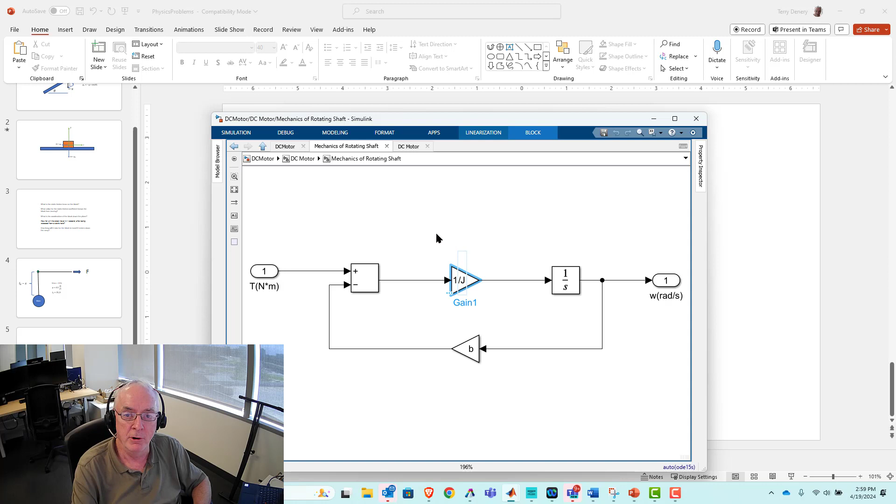All right, what is this? Well, that's the mechanical load for a motor that's just going to turn its own shaft, which makes the inertia of the shaft one of the key parameters. But in reality, nobody cares about the inertia of the shaft because it's really what it will be connected to, which is the most relevant thing.

So anyways, probably lots of people have tools like the ones I demonstrate. We'll demonstrate on a DC motor, but in a way it's a very, I'd say, unimportant problem. And a much more important problem could be something like this, the idea of controlling the angle of a linkage and maybe even a more complex mechanism. Certainly, you see this in all kinds of things, and I won't try too hard to justify that either. But let's continue with this idea.

All right. And so the other thing, we parameterize this, and essentially the model is defined by its resistance in the circuitry. I probably should have grouped mechanics and electric a little better than I did, but let's go now mechanically. It's the shaft inertia. But it's, again, generalized, because we're going to get to that in a moment. The mechanical load itself is defined by inertia, and in this case, damping constant, right? So for this DC motor: resistance, shaft inertia, inductance, the torque constant, and then the damping coefficient.

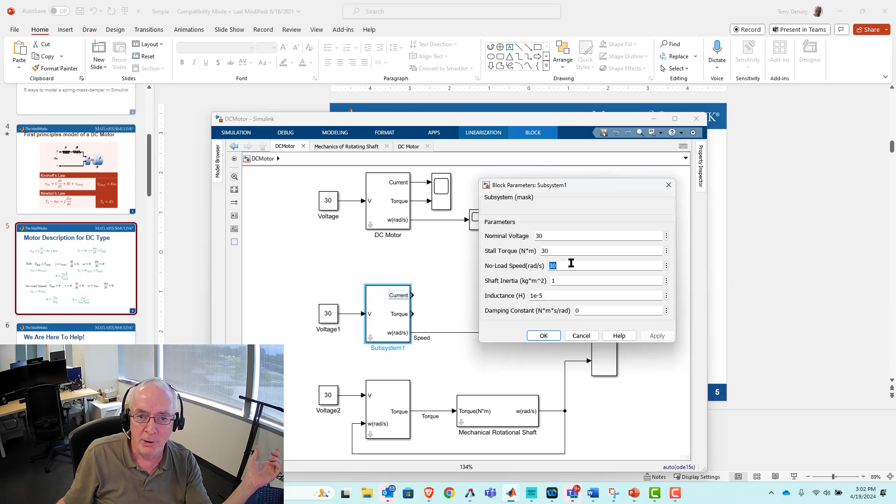The maximum torque you can have is the stall torque, and the maximum speed you can have is the no load speed, and the actual operation of any motor is going to be somewhere in between for each of those. Okay, so hopefully that makes sense. And certainly, if you ever have to buy a motor, you want to know what your torque and speed requirements are going to be, and you're going to choose based on stall torque and no load speed.

All right, so that's the first thing we did. And so then, we're still kind of doing this with this, again, kind of false application, which is we're just spinning a constant inertia shaft. All right, and so I'm not going to say that this is a better performing model, but it's one that gives us options as we move forward.

Okay, and so the basic idea was to take all this and just bring it outside, and mathematically it's identical to what we did here, and you'll see that what I'm going to call this electric motor is really interfacing with the mechanics through input and output ports, and that is a DC motor configuration. So I'll just call that the DC motor, and I'll call this the mechanics. Oh, I already have something called DC motor, so let's call it something really clever like DC motor 2.

Okay, all right. But I really like the interfacing that it sets up, which is motors are responsible for creating torque. That torque gets applied to some sort of mechanism, and that mechanism will move that axis according to what that mechanical load will be. And so only through the processing of that torque through a real mechanical application do we really get a relevant angular velocity, and that gets fed back, and of course that's used to identify the back EMF voltage, which is certainly part of the electric circuit calculation, right?

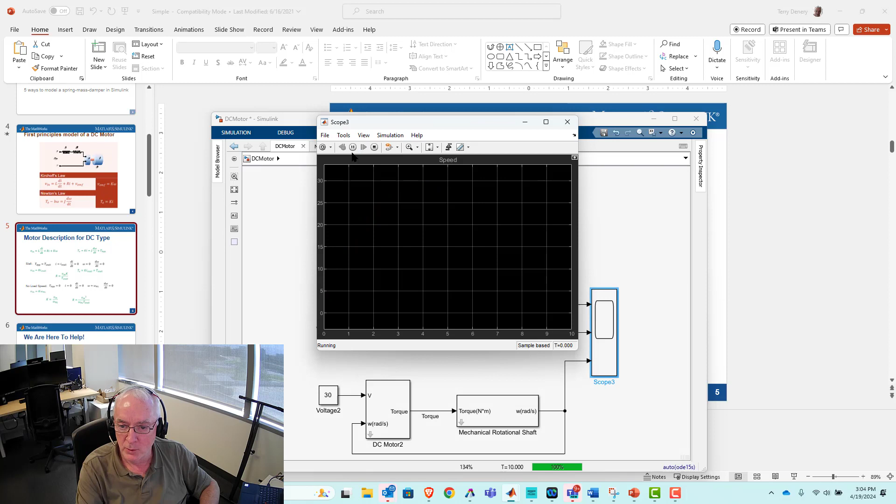And anyways, unless I change something between now and, yeah, all three of them are essentially predicting the same thing. So basically 3 curves right there, red, blue, and yellow. The red, of course, is the last one drawn, and therefore it's on top and we can't see the other two. So to me, I love seeing stuff like that because it means my presumption is correct and that I am accurate and I can move forward.

Okay, so again, just to kind of meet folks where they are, I'm going to go Control C, and I will open up a new Simulink model. Just paste this in. Okay, and yeah, let's do this one even. Again, we just proved they were identical, but this one gives me better options, so I'll paste this one in instead. So what's the difference?

Of course, instead of resistance, inductance, and so forth, we will do this. And it'll be nominal voltage, stall torque, and no load speed. What I also like about this is it was a very nice check to prove to yourself that you have done the algebra correctly. I will show you the algebra too. Let's go to

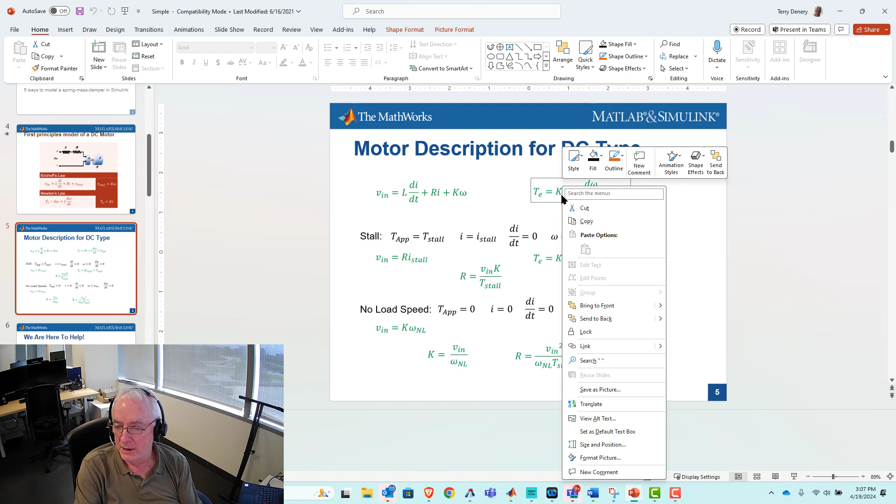And the electromagnetic torque is equal to K times I. Very cool and convenient, and actually quite obvious if you do the analysis, the torque constant K and the back EMF voltage constant K are the same thing. But anyways, come back to this. Well, T is equal to K times I stall, but d omega/dt is equal to 0, and so all that's equal to what we're calling the applied torque T app, which will be equal to the stall torque. And so this equation reduces to this simple expression, and this equation reduces to this simple expression. If you do the algebra, you get essentially a calculation of resistance based on stall torque.

All right, and for right now, K is still in that calculation, but when you go to no load speed, well, what's that condition really about? Well, it means that you can no longer apply any more current, okay? But actually, even before that, what do we really mean by no load speed? Well, what we really mean is no load at all, that there is zero torque generation. It's really when you get to that kind of definition.

That's when you recognize, oh, I is equal to 0, therefore di/dt is equal to 0. The speed, omega is equal to omega nl, the no load speed. And because it can't get any faster, it's not changing, d omega/dt is equal to 0. And with that reduction, you basically get this Vin is equal to K times omega nl, and we plug all that in, and we get very nice expressions for both K and R.

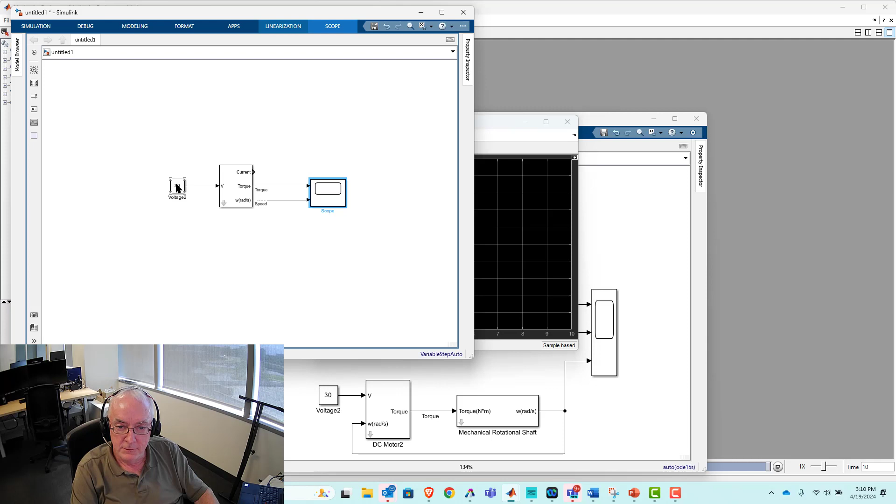All right. So, anyways, let's get back to where we were. And these are our values we're choosing. We may change them. It's all contingent. Oh, let's do this thing I wanted to do, which is let's scope torque and no load speed. Right. And again, notice the voltage needs to be 30 for this to work.

And so with the initial condition of 0 velocity, well, the yellow, that's the first one going in, starts off at 30, and we actually are watching the velocity. That's what the blue line is. And so we do see it starts off at 0, and as the velocity progresses, it reaches a bound, and that's our no load speed, which we saw was defined by 30 as well. And we see also that as it hits its no load speed, that torque reflecting current is equal to 0 as well. That torque will be equal to 0.

So, anyways, now here's where I wanted to get. Okay, all right. And so this was a guest lecture, and one of my colleagues is the regular lecturer, one of my friends, and so he asked me to do this one because he had a time conflict, a schedule conflict, but he also thought it was a good topic for the class. All right, and so he had already done his share of control.

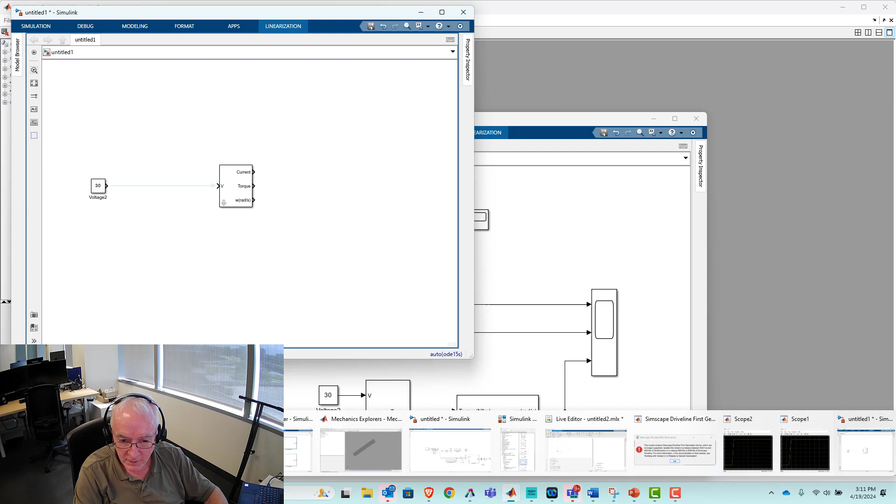He'd done a little bit of describing how feedback control can be used to control a DC motor. And actually, I'll do a little bit of a shortcut, I'll open up a model where I'll bring in his controller, right? And it's very explicit and straightforward, and that's why I like this. You can see the model so well with this, right? And so I'm going to copy that, and bring it in on the model that we're working with. All right, and I'll plug that in.

Right. Again, PID, it's the basic idea of what the error is, the difference between whatever we're trying to control, whether it's angular velocity or angular position. The difference between what it is and what we're commanding it to be, that's our error. And we are going to apply a voltage that will have a component that's proportional to that. This is what we call our proportional gain. A component that's going to be integrated and then multiplied by a gain. So that'd be our integral gain, and then a component where the derivative is taken, and we'll multiply that by a gain. That's our derivative gain.

Right. I think I'll start off 0 there, and maybe we'll make this 1. Okay, and I'm just going to see what happens at this point, because I haven't practiced this one a whole lot, but I want to essentially create the feedback loop. Again, as I mentioned, the error will be the difference between what we're commanding it to be, and we're going to command it to be 30. Right? And we're going to compare it. Okay, and I think I'll do position control. And so I'm going to construct my position by simply integrating the angular velocity.

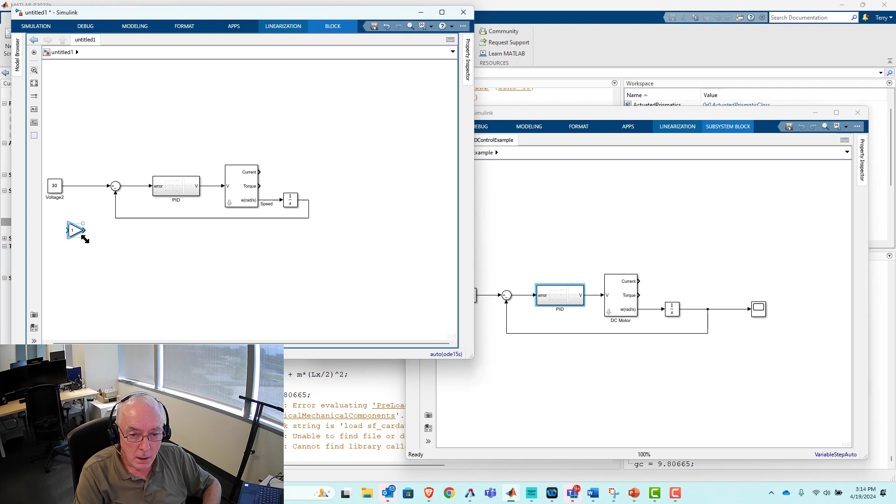180 divided by pi. Of all the gains I've ever assigned values to, probably 80% of them are either 180 over pi or pi over 180. Yeah, I'm doing that one all the time. But basically I just, oops, and I got it wrong. I need it to be the other one. So basically I want to convert from degrees, 30 degrees, to radians, whatever that will be. Okay.

And I think I will do the other one, though. I'll just kind of put it on the downside here. Okay, and we'll put in 180 divided by pi. And put a scope in. And I have no idea, actually, how well this will work, and so I'm just going to hit run.

And that apparently is position, and you know what? It's not so bad. And that's all proportional gain. Right? You see that right there. And we might play the game of trying to make that happen a little faster. And so we add a little more proportional gain, and maybe we'll try 5. I won't go too much further on this. All right, and we just get it faster and faster and faster.

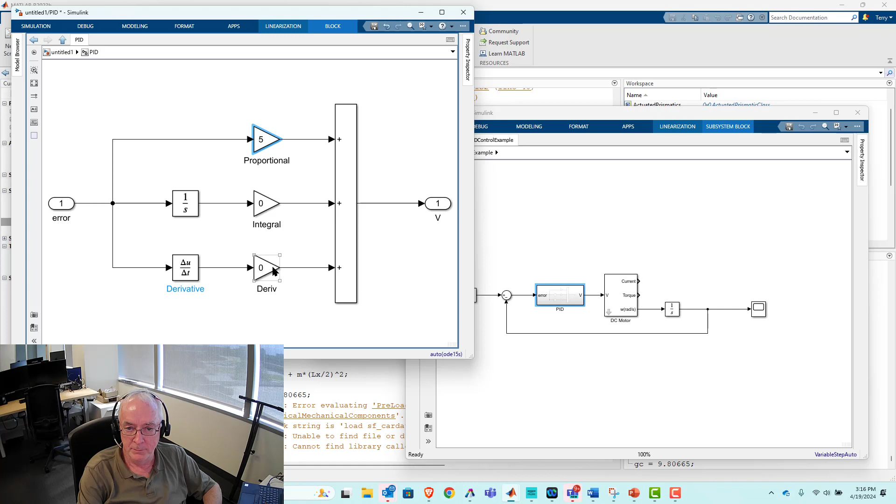Okay, and so in a way, there's always this oscillation, and I think if you're kind of observant, maybe in tune to the idea of waves and oscillations and frequency, you might recognize the frequency is very much dependent on the proportional gain. And there's a strategy to kind of deal with the overshoot that leads to, which is to apply some damping. And again, I'm going to just apply a little bit right there. Right. And see if I can kind of reduce that overshoot.

And whatever I did, I just made it way stiffer. And so I'm not patient enough to kind of wait for that to work its way out. So I'll just kind of come in here and I'll reduce things a little bit. Right. And I'd say somewhere between 0.1 and 1, maybe I'll do one more attempt at this. I'd say we reduced it a little bit. But again, I don't want to claim to be good at doing that.

And I do want to acknowledge that there are people I know, and there's a number of people at MathWorks who are really good at that game, and they know how to analyze according to the frequency domain, and they will use Bode plots and root locus plots and really kind of play this game of response versus stability, and be very good at this in a way that I can't be, right? But fortunately for me, there are alternatives, right? And so in a way, that's what this lecture will be about, right?

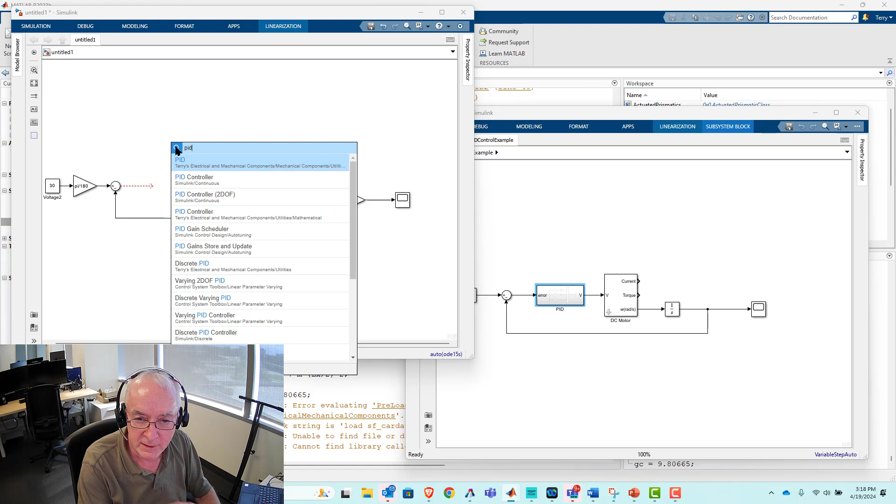And so I think that's about as far as perhaps I personally should go, but certainly, again, colleagues of mine could open up the Control System Toolbox, and perhaps even the DC motor is such kind of a piece of cake for them that they could show you all kinds of cool ways to do this. But what I like about this, okay, and so what I'm doing now is going into the Simulink library and grabbing the block that does PID.

Okay, now this is a very optimizable, it's also very reconfigurable, and so I'm going to show it to you. I'm going to go look under the mask, and you're going to see all kinds of stuff that's going on. That essentially, most of the time is mathematically doing what I showed before. All right. So, anyways, what I'm going to do now, though, is I'm going to click on this button. This is the tune button. All right, and there's something. Well, it may appear mysterious, but I'll say it's beautifully informed on the approach of controls.

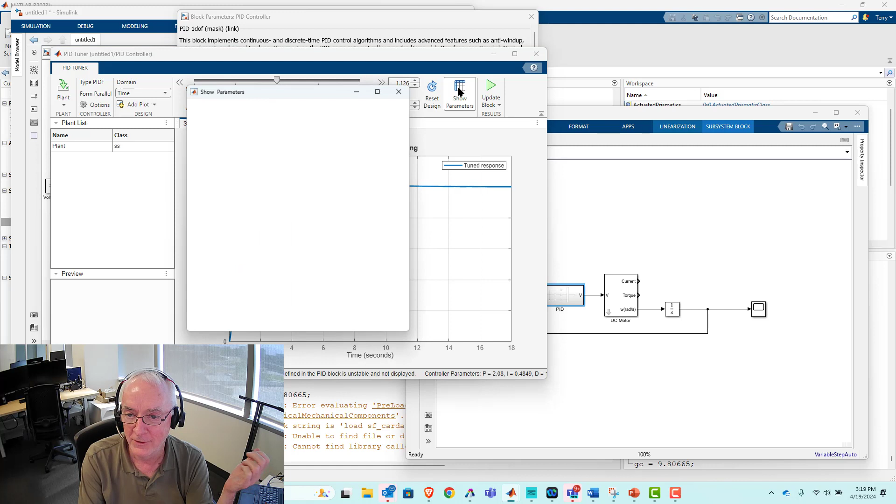And so what we're doing is, you'll see that when I click on this tune button, that's going to linearize the plant model. It's going to do things like identify the open loop Bodes and open loop transfer functions and all this kind of stuff. And based on that, it's going to take these methodologies that, again, a number of my friends are real masters of, and it's going to figure out optimal gains for this.

All right, so there's KP, there's KI, there's KD, there's N. Why did it need to kind of sample the model? Well, because KP, KI, KD, and N absolutely care that it's a DC motor with the parameters that we chose it to be, with the mechanical load that it's really applying this to.

All right, and so again, I like this quite a bit, and the thing I'm going to do now is just show that you haven't given up control of this at all. And I'll say that again, as you consider both faster and more robust, you're playing that game between response and stability. And in general, I just like to hit the faster button, right? And so with that, I'd say a little bit stronger gains, but I have much better response, which is measured by things like rise time, settling time.

And you'll see that as it, again, optimizes the response, that there is an overshoot, all right? And in general, you want to minimize that overshoot, right? And I won't go much further than that. I'll go ahead and close that. I'll update the block with the values that it identified for us. And I'll close that, and you'll see all those numbers are in there right now, right?

And that's too bad it kind of cleared what was there before, but I'll certainly show that we got a pretty nice response now. And so we commanded 30 degrees, and we're hitting 30 quite well. All right, and so we got a little bit of an overshoot. And this is where I'm going to kind of put this on the shelf for a second, all right? But we're going to come back to this.

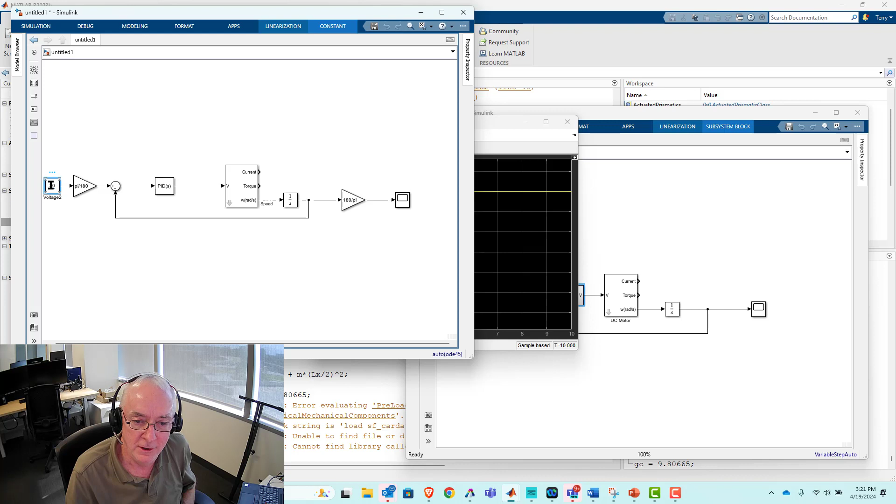And one of the beautiful things about PID algorithms is, well, they kind of acknowledge, well, I can't do that. It's a violation of F equals MA, which exists in a rotational form, at least in this kind of two-dimensional problem: torque is equal to inertia times alpha, the angular acceleration, right? And so that's a very reasonable response. It only overshot about 4 degrees, and got to 30 clearly in less than 1 second, right? So that's kind of cool.

Right? And so, you know, there's the idea of the impossible request, which is that right there. But there's also this idea of carrying through lots of state variables, DI, I, omega, and position to get what you need, which is far more complicated than what really can be handled.

And so PIDs are nice. They're empirical. They will work, and there are methods that can tune them to really get very favorable performance and responses for your system. But if you really need to be accurate and you cannot tolerate overshoot and stuff like that, there are ways to be better. Okay, and that's what this lecture will move into.

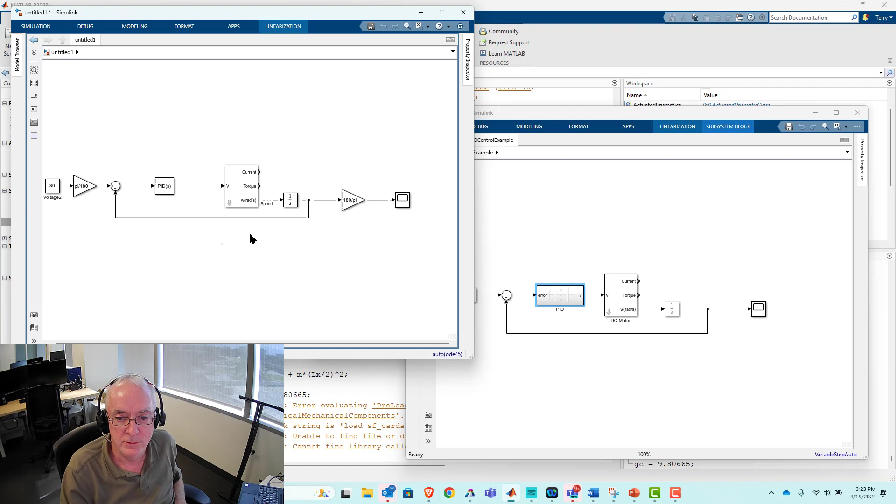All right, and so I think the first thing I'll do, okay, what we got right here? We got 30, 30, 30, 1, 1e minus 5, and 0 damping. Okay, fair enough. All right, so let's go back to my DC motors. Right there, right? And we already proved ourselves that these are all the same. So we should be getting the same response with this. So let's see, how do I select all this? I think that will do it. Let's go Control C. Let's paste this in like this.

Okay. And let's make some room. Make that a little bit longer. And let's replace this. Okay. All right, and so let's go to the scope. Let's hit run.

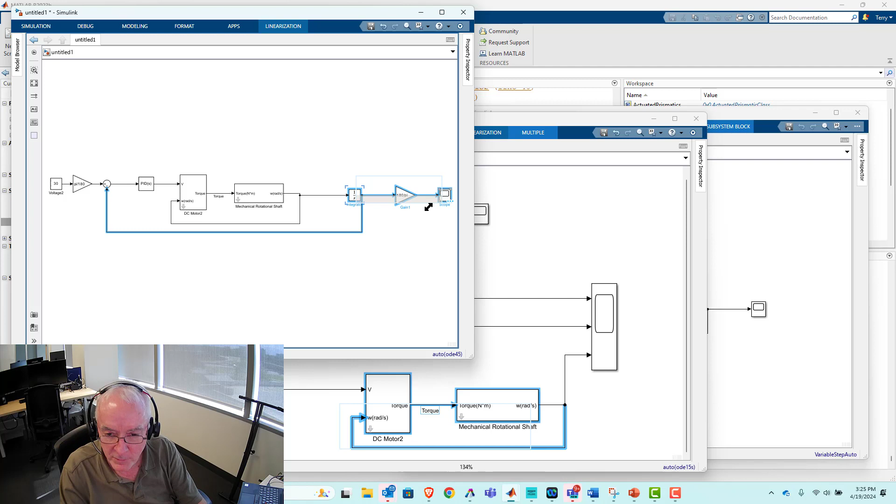So that was bad presentation on my part because we had already zoomed in on the range on this. And so this is the exact same result. You can see that's about 4 degrees overshoot. And if you compress the scale to about 2 seconds, I think it looks pretty close. So please excuse me for that. All right, I'll be a little bit anal at this point and just get those lines a little straighter.

All right, and okay, well, here's an idea. Kind of bring this up. This is how this lecture actually started yesterday. I did this live, and what I did, here, I'm trying to get to my YouTube account.

It can be a little embarrassing showing your YouTube stuff, but let's go to playlists, and this whole session really began right here. It's my YouTube channel, Terry Denery's Engineers Studio. And I went to DC motor control with an Arduino hardware. I'll even show it to you. I got it right here on my desk.

But I don't want to spend the probably 10 to 15 minutes it would take me to do this live. But anyways, here's the Arduino. It's on an Arduino motor carrier. My motor is this kind of $20 DC motor with an encoder that I bought off of Amazon, and basically I started off showing that I can make that thing turn four revolutions in 3/4 of a second and do it with almost

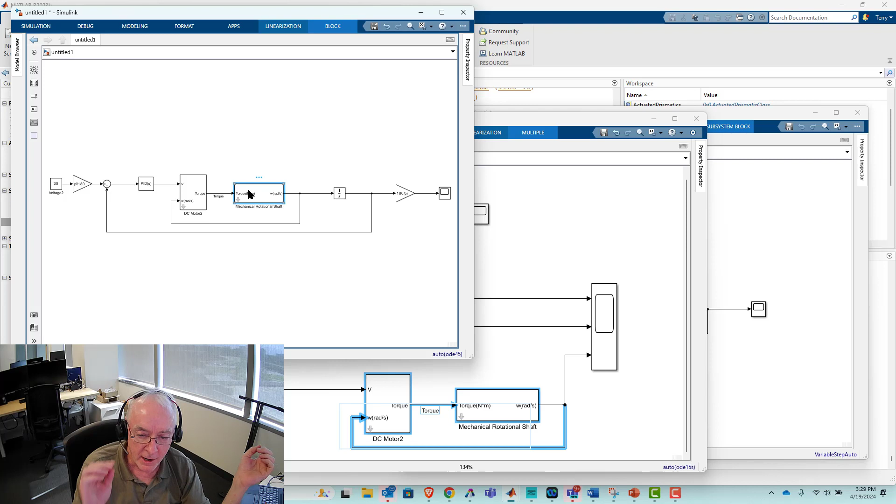And I meet with professional customers of MathWorks tools all the time, and they're always looking for advantages to get more accuracy, more response, and more robustness and stability for their calculation. Okay, and it turns out this kind of feed-forward approach goes hand in hand. Actually, I think this is a good point to deal with this, which is the simplicity of this problem is a bit of a problem, right? And so we're going to switch now. Let's get to it.

I created these models right here. I think I'll even package these. All right, so let's go like that. Create subsystem. This is what I call forward dynamics. It means I'm sending motor torque expressed in Newton meters, and I'm going to get the response of the motor. So we're going to create that. You'll see motor torque and motor underscore M. Let's see, how do I want to do this? I want to keep it simple, or at least let's call it focused.

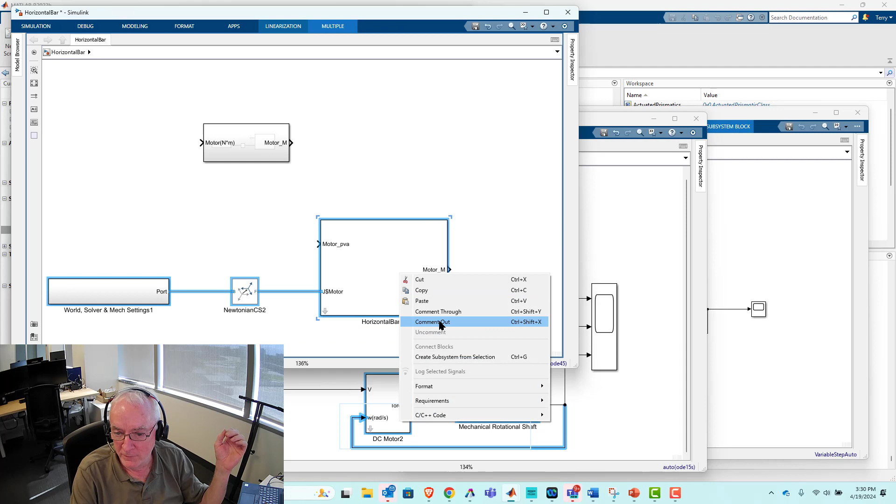All right, and I think I should show you what this is. So let's go ahead and simulate it. Let's hit the run button. And let's bring up the animation of that. Stop, reset. Okay, and we got 2 beams there, and here's one we're just running. I know I'm showing a lot, and I want to make sure that this is not confusing. So I think the best way to do this is let's hide this one right now and essentially remove it from the calculation. So it's merely commented out now.

And this one, I want to give it a better name, so when we focus on it, you'll see what it is. So I'll call it Terry horizontal bar, with the space in between Terry and horizontal. Okay, now let's run it again, and this time we'll just see it by itself. All right, and there it is, Terry horizontal bar. Let's reduce, move it up slightly, and observe it one more time. So basically it's a simple pendulum, all right?

But in truth it's actually a motor, and it means that we can send a torque in, and through that torque, control its movement, right? And that's the way to put torque in, right there. It's always good to do a little bit more demonstrating to prove your point. And I think I can show the effect of the torque here. So I'll hit the green button right up here. So I'm running it from the animation window.

Oh yeah, clearly 1 Newton meter is going to push it up, and once it's going up, there's no stopping it. It's going to just continue to gain speed. You'll see a little bit of what they call strobing. Yeah, so the animation gets a little bit weird. Anyways, I think that's enough. I'm not going to belabor this too much. All right, so I'm going to go Control C. All right.

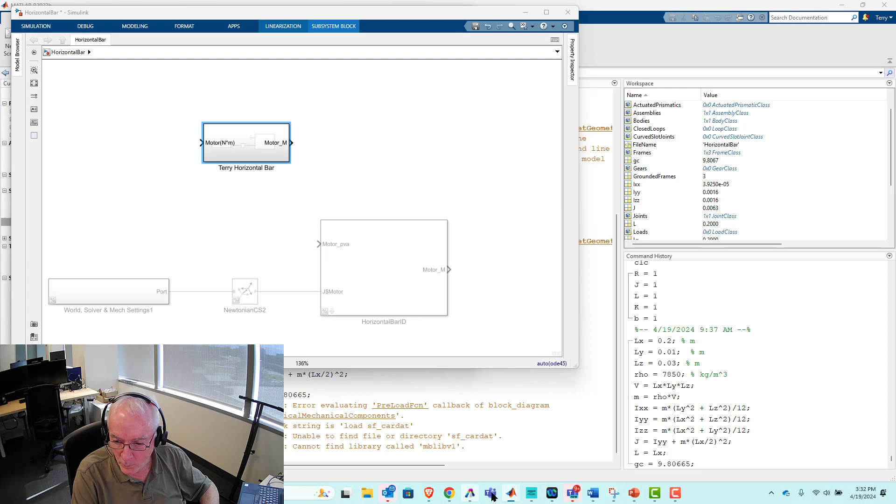Some of these things down. I don't think I'm going to need the DC motor anymore, and if I do, we'll just bring it back up. So let's go ahead and say no on that, and let's get to the model we were working on. Got way too much open right now. So where is it? It is right there. It's untitled. We still haven't saved it, so all this is fresh.

Again, I'll just run it one more time before we start changing things, and this is where we stand right now. I think we're reasonably confident we're accurate at this point. So what I want to do now is paste in Terry's horizontal bar. And now I need to fix something. I don't know if it's really broken, but I do need to address something. First of all, why is that line thicker than that line?

And so let's go to bus selector. Okay, keep on missing. Yeah, you should do it this way, go back up. Okay, so this is a bus selector. You need to connect to a line before you really should open up the block parameters on a bus selector, because what's going to be filled in is really the contents associated with that line. And so it's essentially a stream of information.

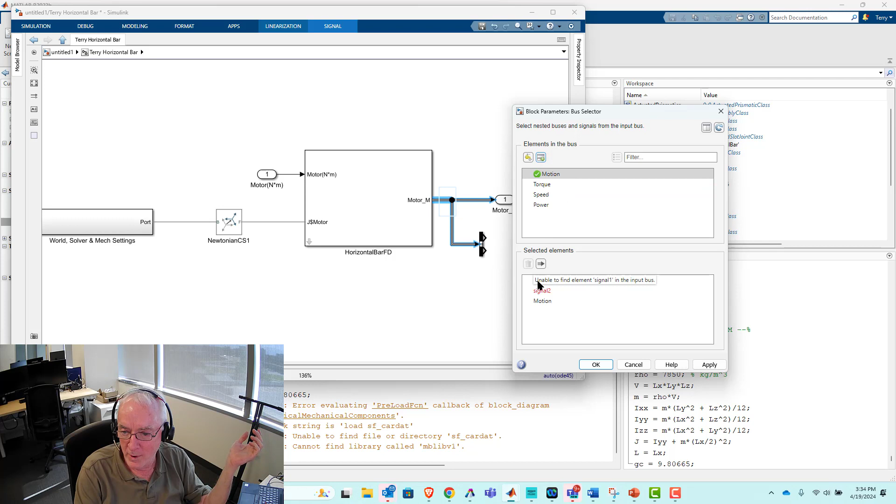I think the word bus actually came out of the electronics industry, and it's a way to essentially pack up a bunch of sensor signals, perhaps in multiple wires, but also put an interface on it so that you can go pick out what you want. And so anyways, we're going to pick out motion. With regard to this presentation, we haven't explained quite well yet what we mean by motion, but I'll just reveal it right now.

And I think I'll do it this way, DEMUX. This is a packing of signals too, but think of this as an array with 1, 2, and 3 elements. The definition of what we call motion is really the combination of position, velocity, and acceleration. And why is it 3? Well, F equals ma is in a way the reason, and mechanically it's generally 2 states that are carried to define the current condition of that mechanical system.

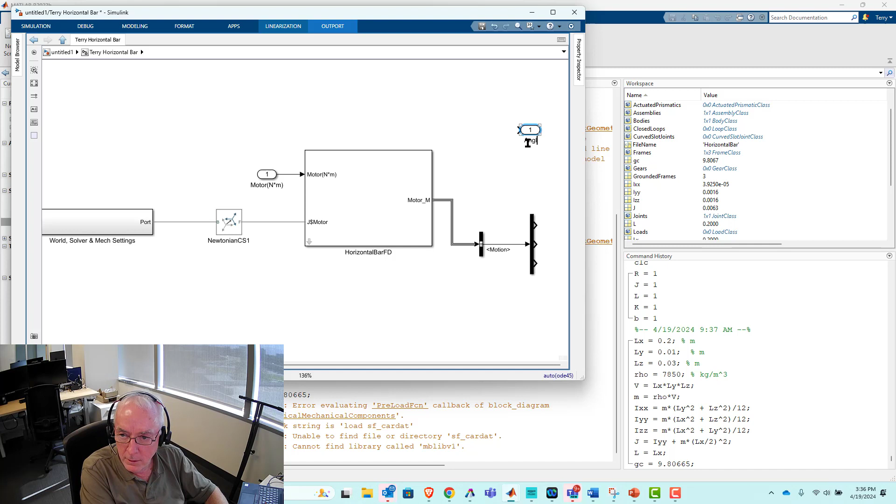If you think of what we're doing with this example, a horizontal pendulum, think of its angle and its angular velocity, so theta and theta dot, as its 2 states, and then the driver of it, of course, will be the second order derivative, theta double dot. But what I want to also do is let's delete that. Let's rename this. Let's call it angle. And again, I always like to put in units, radians per second. And that's pretty good.

I'll put that right there. Let's get Terminator, just so we don't get any warning messages. Let's plug those off like that. And now I think it's getting really clear that we're defining an interface between electric motors and mechanics. I'll even make the boxes the same size. Oops. Click on that, shift, click on that. And I'll go to format, and I will match the sizes. Okay.

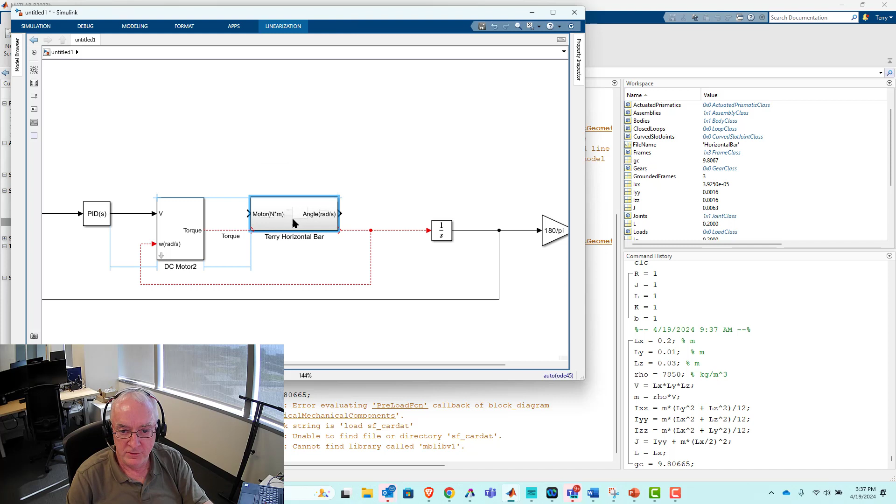Mechanical loads change like that. Where did this block come from? Well, this came from whoever designs or models the mechanics. So perhaps we're seeing a little bit of this idea of groups working together in collaboration. And if they are going to work together, they better be on the same page with stuff like this, which is not only that it's an input of torque, but an input of torque expressed in Newton meters, and it's an output of angle.

And look at that, I got an error there. We did mess up. I'll back up a little bit just to show the error. This is radians per second. The fact that this guy's capable of measuring angle, maybe I want to standardize a little bit more on angular velocity, but I doubt it. So I'm going to make the call and say, in this case, our output, our measurement will be angle, not angular velocity. So I'm going to delete that, pop that in, and of course, we don't need to integrate that anymore to get position.

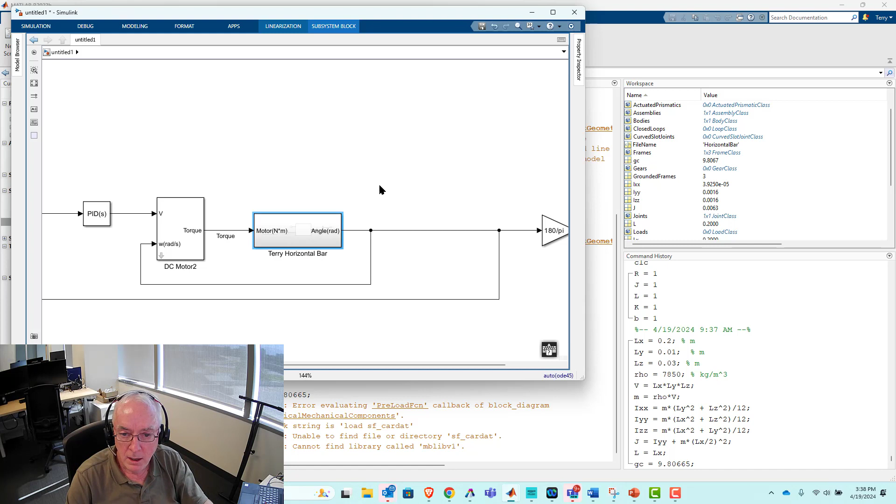Okay. Now this worked so well last time. Well, I don't think it's going to work nearly as well. Wow, that worked pretty well. Okay. And got kind of a crazy oscillation at the beginning, and you might even argue that my mechanics is outsized by how big this motor is, right? And again, nominal voltage is 30, stall torque's 30, no load speed's 30, inductance 1e-5.

And we'll kind of work on this one though too. Oh, here's always a good thing to check, right? Is we got voltage right there. And you'll see there we're basically requesting, what is that, about 900 volts? Yes, with a big oscillation, right?

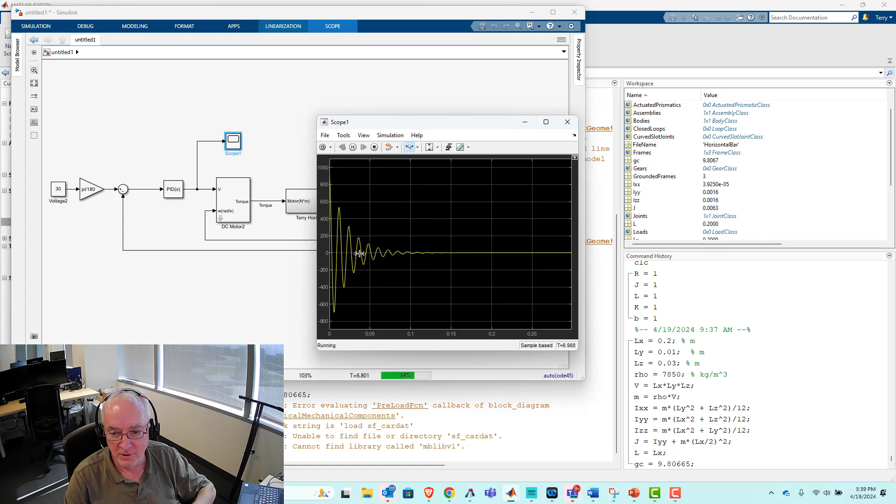So along the lines of what I really wanted to get at, which is this is not the way you do it. You do not use a single PID to essentially control, I believe it's 4 operational states for this overall system. And so I'd say that kind of the reality of this will kind of come through. Actually, this is not, I'd say, the way to do it, although it's a useful thing to do, right? It probably is the way it is done sometimes, but I'll put the limits on voltage into the controller so it can never ask for more than an absolute value of 30 volts, and let's see how well it does that.

And again, I would say that is not awful. I'll say it this way. I'm kind of impressed it did that as well as it did. All right, and if you look at that in an animation, you get, do that one more time. Stop. It's kind of a weird motion, but absolutely it could work. And so I'm not going to condemn it, but I'm going to just say that I think there's a better way to do it. All right, and where we're going to go really is that transition.

Okay, again, we've already talked about the impossible request, which we're saying go to 30 degrees according to whatever your PID and your DC motor will allow you to get away with. All right. Now, the other thing we're dealing with here is, well, we're using a motor that perhaps is capable of way more torque than we need, and that we're perhaps limited by what range of speed it's able to operate under too. But again, these are good things to understand, stall torque and no load speed.

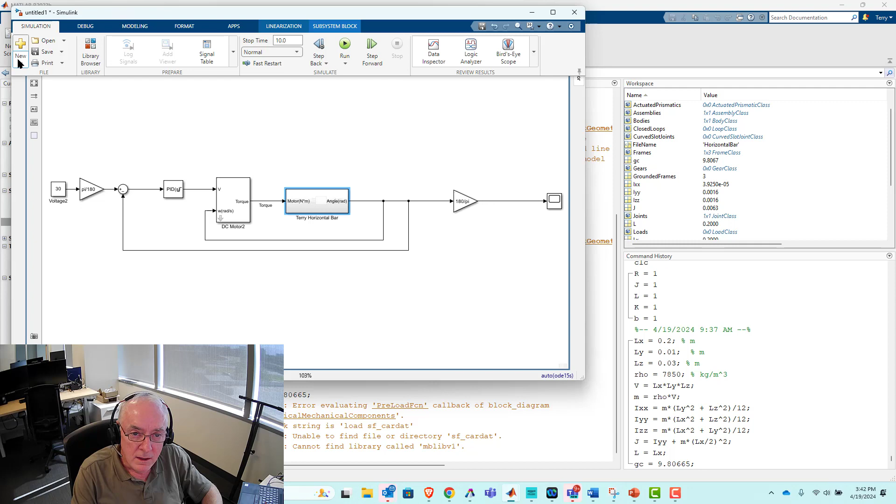All right, so the way I think this is best done, and so I'm going to just start from scratch again, is to do what they call inner loops and outer loops. All right, and so the way you do that, well, you kind of begin with the outer loop. Now I think as we go through this, why they're called that makes more and more sense too. But let's go here. Let's go PID. Oops. That's my own configuration. You see it shows up in Terry's electrical mechanical components. Right? So this is one that ships with Simulink.

So we're going to use a PID again, right? And we're going to adjust directly the motor torque. We're not going to worry about the motor itself and what voltages and currents need to be. We're going to just say, if I have this ideal torque delivery system, I want its torque to be adjustable to get the movement that I'm going to command.

And so let's go ahead and construct that error. I'll get a sum block. And I will feed back that angle in radians. I will assert 30 degrees again. Right. And let's measure it with one of these two. And let's put a scope in there to get it.

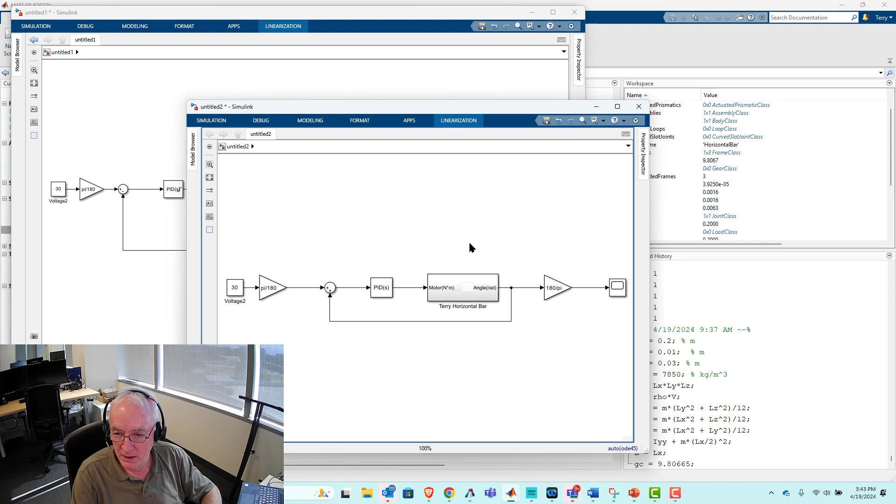Okay, so that's basically what you'd call an unstable controller, right? And as I mentioned earlier, that's what control engineers worry about. They're absolutely concerned about stability, at the same time doing accurate control with rapid response, right? But it turns out KP and KI, probably both being one, is probably way more than you need out of this, right? And so again, it's the idea that this PID adapts according to the problem at hand.

I'll say it this way, the values of KP, KI, KD, and again that fourth parameter N, which defines the quality of derivative that you might calculate, those parameters can adjust to apply to all kinds of applications. And again, it's a remarkable thing, right? And so we do this whole method and we linearize the system and everything, and here's the values it will give us. And I'd say I'm not happy with rise time of over a second, nor a settling time of almost 14 seconds. So I will make it faster on my own.

And perhaps I like that. It's kind of interesting, all three are negative, right? That makes me think I made an error, right? And in a way, the method is kind of clear in saying, oh, I don't care, right? And there's your error right there, you know, that's not an error calculation right there.

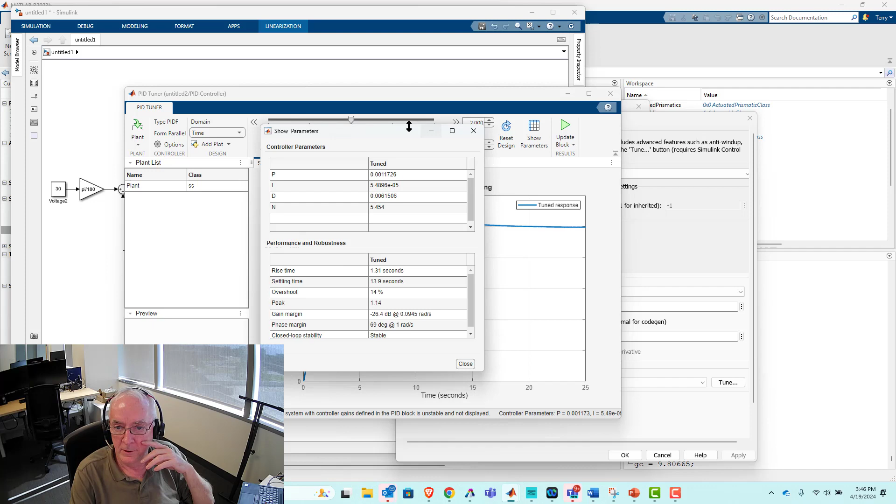So again, we're starting off with KP equal 1, KI equal 1, zero derivative, but this filter parameter N will have a value of 100, right? And so let's go to the parameters. I think we'll see they're all positive this time, which they are. And if we want it to be a little bit faster, those are the values we get now. And I think I'm probably good with that, so let's go ahead and close that.

Let's update the PID. All right, and close that. Make sure I get those numbers in. Yes, I did. And so that is really, really interesting. Okay, so what happened there? All right, well, one way you might fix it is, okay, I think I somehow fell short of the faster response I want. So let's go ahead and retune it one more time. But there's a number of reasons we got that interesting response we just got.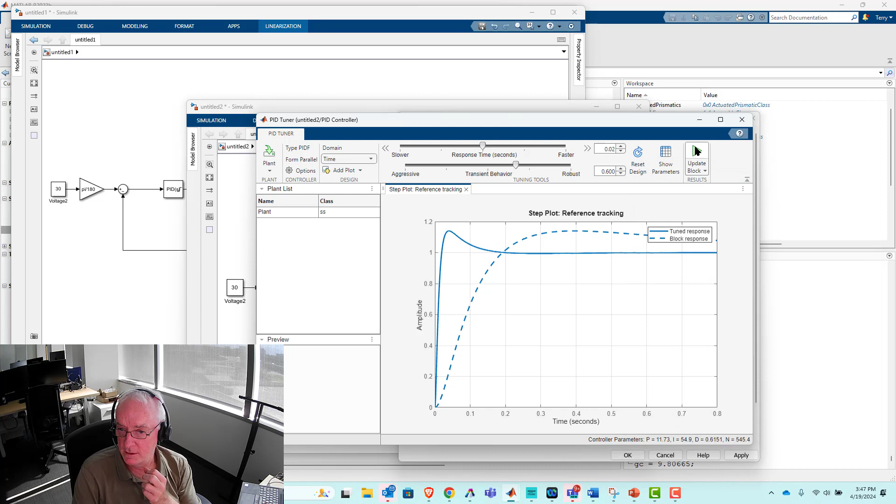Okay, so yeah, I did update it with those values right there. And let's try it maybe one more time a little bit faster. All right, and we'll close, update, and we now can close this. Those bigger numbers are in there now. All right, and now we get to work.

Okay, now I think that was an interesting error that we just observed because it revealed quite heavily that this linear control approach can be a problem because it is a linear control approach. And what we ultimately are doing with PIDs is we're really attaching, you might call them springs, you might call them rubber bands even, between how we want that pendulum to move and how it's really going to move, right?

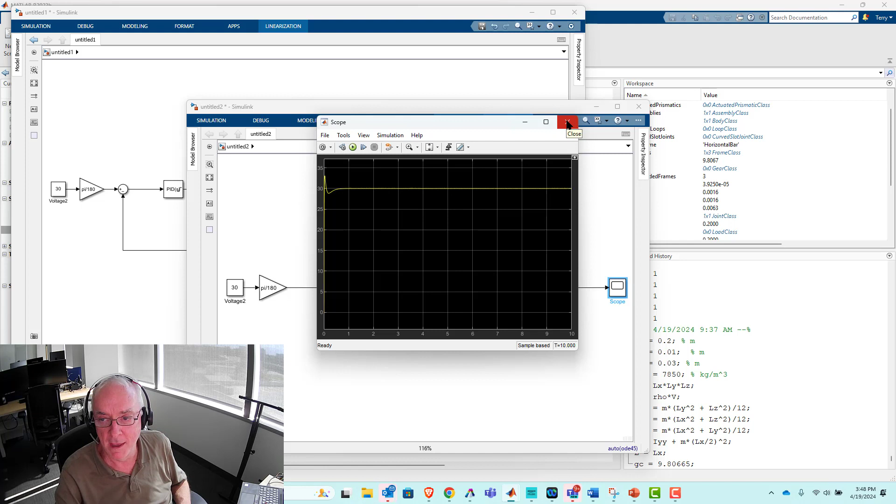And if you especially look at the proportional component of a PID, it's exactly the formulation of an ideal spring. Follows Hooke's law to a T. So anyways, that's kind of what PIDs are, and it's amazing that the methods are there to really rapidly adapt them like we just did here. And in general, if I make a PID strong enough, I can get something like this to sort of work. Now again, you'll recall we're going to have to have an electric motor do this, right?

And so now I want to address a couple of things. I want to now address the impossible request. And at the same time, I want you to be in charge of the transition, not the PID, okay? The PID's job is really just to keep it moving the way we want it to move. And certainly we know we cannot ask it to move impossibly as we do with the step function.

All right, so let's go ahead and now get into what I call PVA, or motion. And we saw motion a little bit. Where was that? We saw it in here. We saw we muxed or demuxed it, and then we terminated out the velocity and the acceleration. All right. And why is this so important?

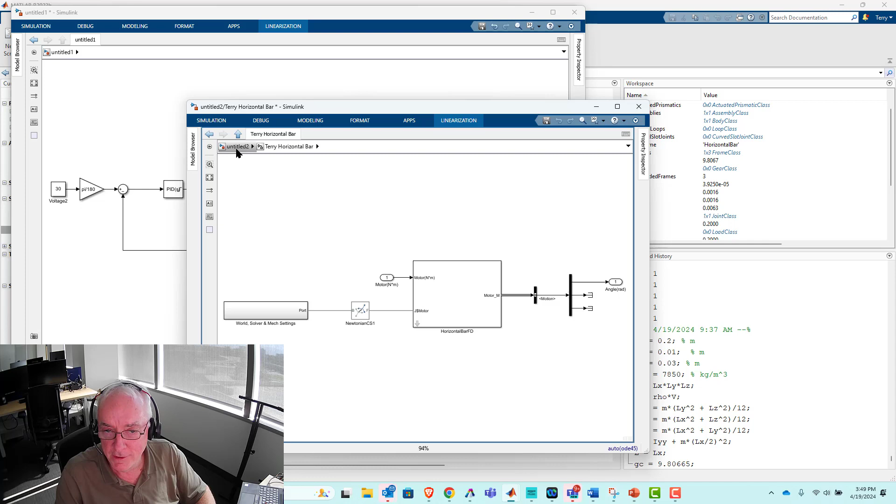Well, if you do the equations, actually this is what I spent a little bit of time on this afternoon, on the mechanics of a pendulum, it's all about theta, and it turns out theta dot, in the case of a pendulum, is actually not that important. But what we get is a relationship between the torque applied, the inertia, and the second order derivative of theta, which is essentially the angular acceleration. And it's an equation that sort of looks like this.

It means that if we apply this torque Z, and we have a torque that's going to be produced by gravity acting through the center of mass of that beam, we know that that center of mass is the midpoint of the beam, and therefore it's L over 2, and that moment arm, therefore, is L over 2 times cosine theta.

We kind of know what these equations sort of look like, and certainly we're seeing very clearly in this example that it's got a dependency not only on position, and that's the kind of less obvious one. We obviously know the torque has a dependence on the angular acceleration. And it's clearly a nonlinear problem because we've got this nonlinear function of theta involved in essentially setting what the angular acceleration will be.

And so anyways, I don't think the linear method... Well, I'll say this: I think it's pretty darn impressive it works as well as it does. So let's begin by again choosing a motion. We're going to go to Simulink Library Browser, my motion signals. We get one of these guys, smooth step. Again, I've got way too much stuff open. Okay.

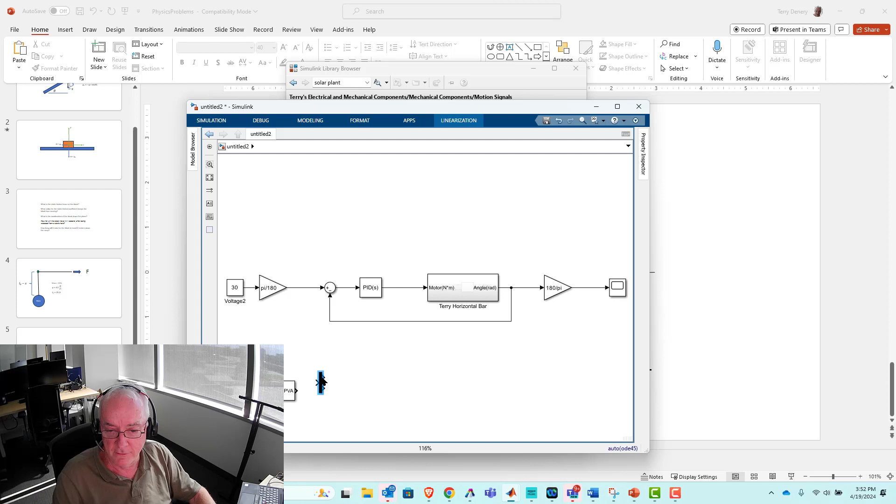So again, I'll demux it. There's something called a selector, which is a little cleaner, but for our purposes, it's kind of nice how explicit this is. I'm going to get a scope on this. Let's make that as tall as this one is, and under format, we will match the height. Then we'll bring the signal right up to the scope, and it will create another port for us, so we've got all three of them. Let's hit run.

This is showing position in yellow, velocity in blue, and acceleration in orange. That's why I created my own blocks, because I wanted perfect calculations of position, velocity, and acceleration. As you separate these, you'll see position on top, velocity second, and acceleration there. It's pretty clear that's the first derivative of that one, and this will be the first derivative of that, hence the second derivative of the position. So P, V, and A.

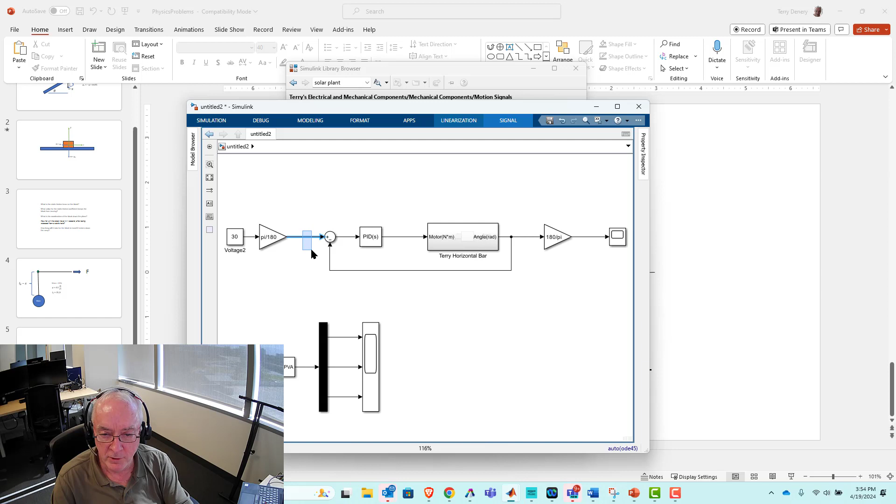So let's set this up. Let's start the transition at 1.5 seconds, perhaps go for 2 seconds, and of course go to 30. Now I'm going to replace, and I need this to be in radians once it gets to the motor, so here's where we'll make our replacement. I'll pop that in like that and hit run, and at 1.5 seconds we should see the transition. And we see it actually works really quite well.

Anything I want to say with regard to that? Not exactly sure what that is; I'm not going to fret about it right now. Again, it's not a whole lot of drooping, but a little bit. Let's do the quick analysis on it. Here's what we've commanded to happen: the first 1.5 seconds, we just wanted to hold a position of 0. So what happened on the droop? It got to 0 pretty quickly, probably by at least 2/3 of a second it's pretty close to 0.

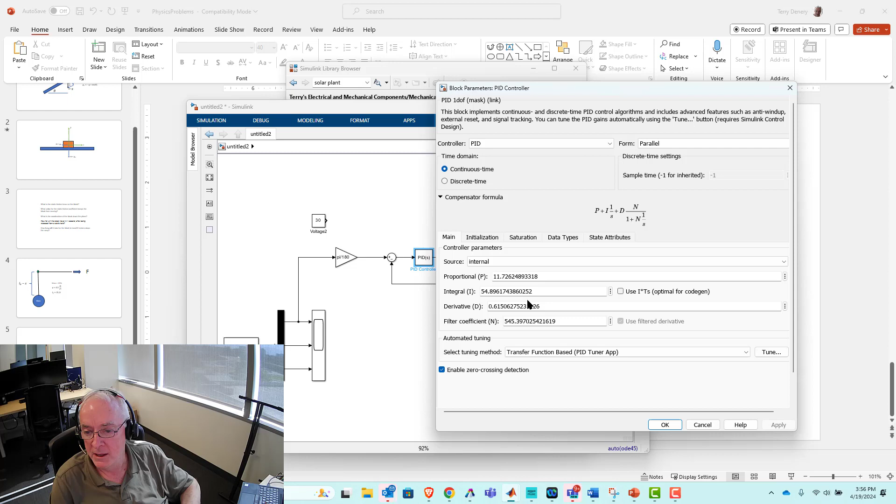After a little time, that error got integrated and built up enough so that, once multiplied by this number, it was able to zero it out. So that's PIDs, and actually a good example to explain what integral control is all about. Otherwise, this is better than I hoped for. Look at that, that's quite beautiful.

Almost 0 overshoot. There's a little bit, you can see it right there. This is degrees, so we're talking about a couple of hundredths of a degree of overshoot. Now, let's see how far we can get with that, and make this maybe 0.5 for the transition this time.

Okay, and we're going definitely much more, and we're about 1/2 a degree at that point. Again, you might be perfectly happy with that, right? You might not like this, but there are lots of ways to deal with that one, and let's not really even be concerned about too much yet.

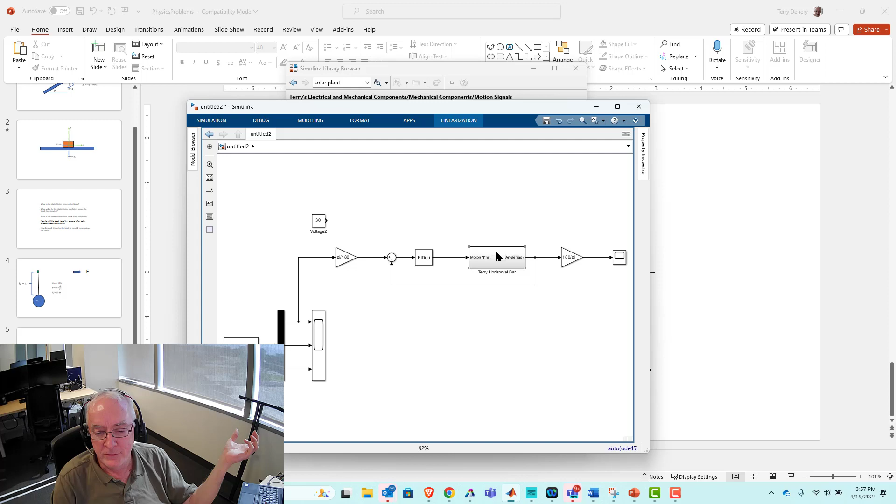But I'll just say that the errors we're seeing and the overshoots we're seeing, and certainly when we asked the impossible requests, well, how do we approach the impossible requests? Well, let's do it this way. Let's make a transition in 0.05 seconds. Okay. Now, it seems awfully fast, but that's real. And we begin to see something that looks quite a bit like what the step response was.

All right. And so anyways, let's now fix this, right? And so now I'm really going after the linear control approach. And so I think the easiest way to do this, actually, here I'll show this model. This was the other thing I was working on today. It's a little bit of a mess, so hopefully this is not too much of a problem. Okay. Boy, this is a mess. Okay, let me get into this a little bit.

All right. So we saw that equation in my PowerPoint slide, and it's essentially expressed in this MATLAB function right here. And so theta second derivative is calculated in terms of the applied torque and the current angle, as well as the mass, the gravitational acceleration, the length, and of course cosine theta. So we saw that equation a little bit earlier, and we simply integrate that.

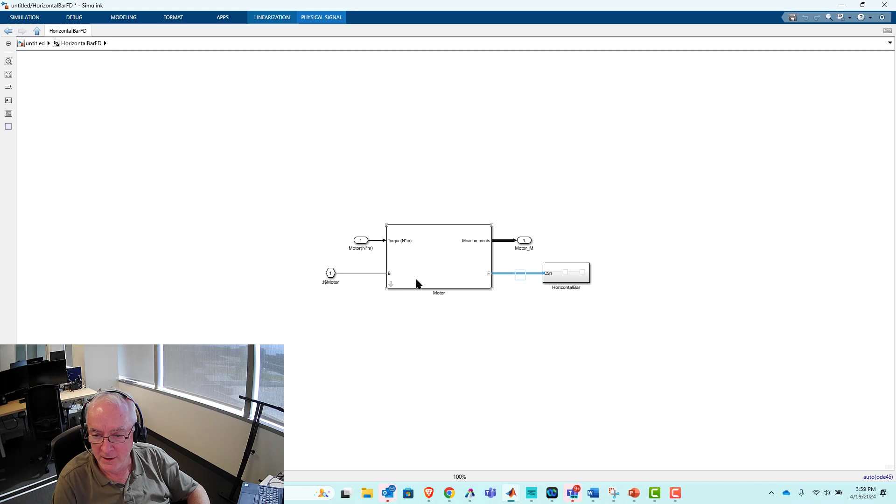And this part of this is merely, I'll say, something that I validated with our mechanical model. Now, we haven't talked so much about this, but let's go and get into it a little bit. This is Simscape Multibody. Notice lines don't necessarily have to have arrows anymore, and that's because we're talking about mechanical structure at this point. And the structure of this mechanism ultimately is that there's a rotational joint connected to the ground on one side and connected to the bar on the other, and that we can apply torque through it,

and that we can measure all kinds of great stuff, including the torque we put through it, but as well the angle, which is called Q, the angular velocity, which is called W, and then the angular acceleration called B. And you'll see from this we can construct things like power calculations, which would be torque times speed, and this is essentially the creation of a very useful output which we pump into a bus. So this is Simscape Multibody, and of course the bar itself is perhaps the most important part.

And there's that bar, and based on that shape, we parameterize with a MATLAB variable its length, so we can make it longer if we want. But that geometrical definition of length, width, height, defining a volume multiplied by density, then leads to the mass properties. And so you update this and you see mass, but you also see moments of inertia and center of mass and important mechanical parameterization. And position, of course, is everything.

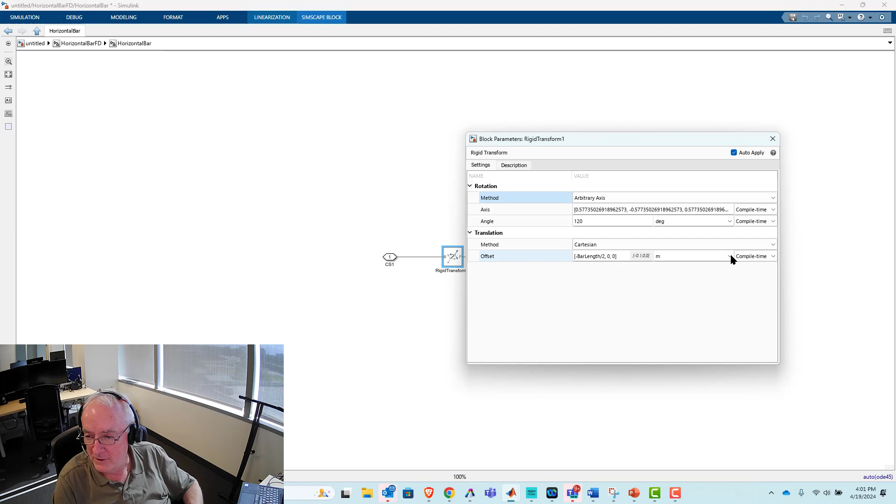Again, part of Simscape Multibody is, how do you position these, and you use all kinds of rotational methods like quaternions, rotation matrices I like, and Euler angles and stuff like that. And then positional offsets are kind of easy. X, Y, and Z Cartesian is typically the way you do it. So that's the kind of quick and easy, you don't have to be an expert in rigid body mechanics to do it kind of stuff.

Whereas the approach I took here, I wouldn't call myself an expert, but maybe I can do a little bit. And so I did basically the pendulum problem. So with Simscape Multibody, we got a more generalized methodology, but I'd still say if you do know the equations of motion, they can be pretty useful too. All right. And okay, so why is this important?

Well, it's because if we can do this, which is send in torque and angle and get out of it angular acceleration, it means we can do this too, which is send in angle and angular acceleration and get torque out. And so this is essentially what I'd call the inverse dynamics, meaning tell it how it should move, sending in angle and angular acceleration, and tell me what the torque is.

Okay, and so this is what we're going to do now, is that we're going to use this. You can kind of see this whole model was about setting up something which we're about to move into. And yes, PIDs are still useful, but you'll see that they get, I wouldn't call it relegated, they get focused to what they're really, really good at, which is making error go away. All right. And so I think the way I'll do this now is I will disconnect that. I will paste this in.

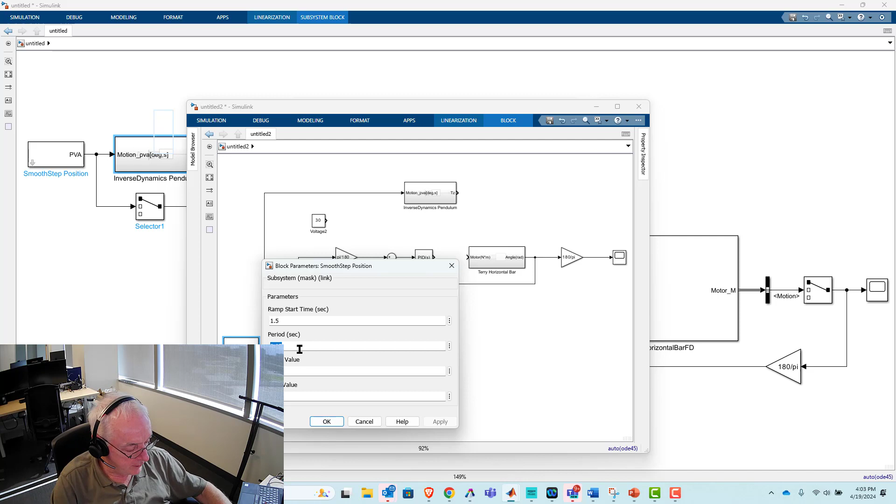Motion PVA. This time actually expressed in degrees, right? You'll see the converters part of this block. Not sure I like that right now, but it's a good thing I caught it because it means I go directly from here into there, right? And so again, we're going to 30 degrees in 0.05 seconds. Again, let's start off with the easier problem, and let's do it this way.

Now, isn't that interesting? Looks like it's doing really well, and then all of a sudden went crazy on me, right? And again, it's an unstable controller. It goes to like 10 to the fourth, right? So what's so great about this inverse dynamics approach? Well, my claim really was not replace all your control approaches that were with feedback with feedforward. That actually is a dumb idea. But what I'm really claiming is what you know about this system is really, really useful, right?

And so the ideal approach to this, I think I got it. I'm gonna do it this way now. It's the combination of the two, all right? And so the way we're gonna do this now is let's use one of these add blocks. Pop it in here. Let's get that feedback right there. Let's move this up like that. And let's put this feedforward in like that. Okay. And I think we got it. Let's click on this. Let's hit run. And rescale. Boom, we're perfect.

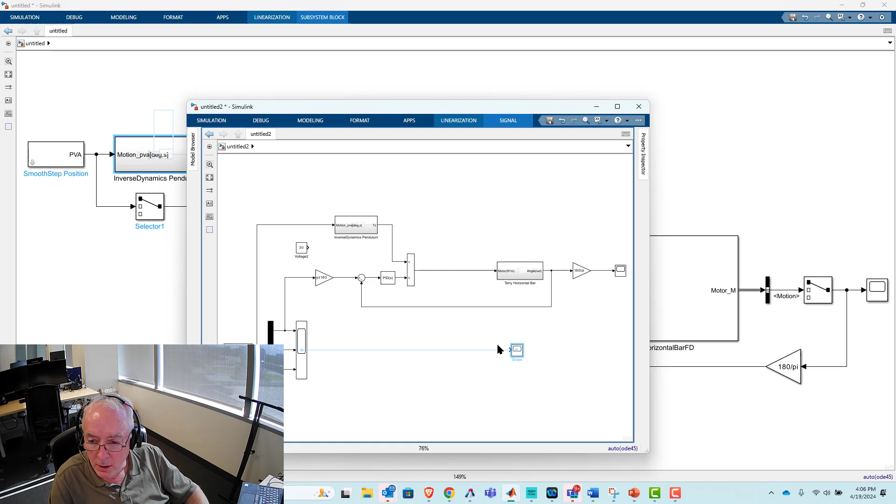this will get a little, well, I shouldn't say messy, but I do want this to be in radians, so I'm going to go on this side and get that. Oops, I don't actually want radians, I want radians per second. And so I'll do it this way. Okay. And now, where it's being expressed in degrees per second, let's get that in radians per second. All right, and let's run this one last time. And we'll just scope this like that. Okay, and let's hit that. And let's see what's on top.

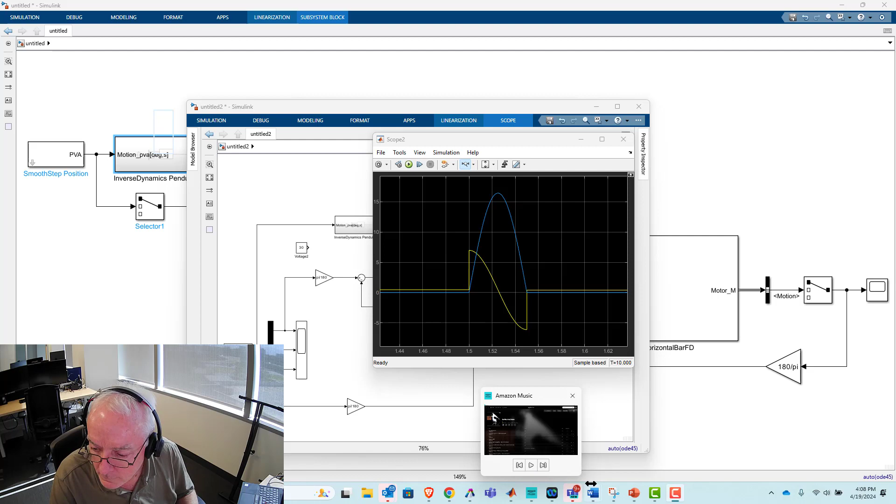Top is torque, and on the bottom, the blue is velocity. And so we're going to see a speed that's, let's just say 20; it's a little bit shy of 20 radians per second. And the top torque looks like it's about 7, so let's say it's around 10. And what we're doing with this really is what you always have to do when you use real motors, which is you need to size or choose the appropriate motor. So now let's go get our DC motor. Oh, I shut it down. So let's go in here, DC motor. Yeah, there it is.

Control C. Kind of delete all that stuff. And let's paste this in. Okay. All right. And now we're going to, again, get into the feedback loop that we're going to use here. Right.

And so it's going to be PID. Like that. All right. Let's get a sum. That. Move that. Okay, and let's not make that error where I left it as plus plus. Let's make it plus minus. And so do PIDs, do you have to do it only on angle? Of course not. It can be whatever you want it to be. And so in this case, we're going to do it on torque.

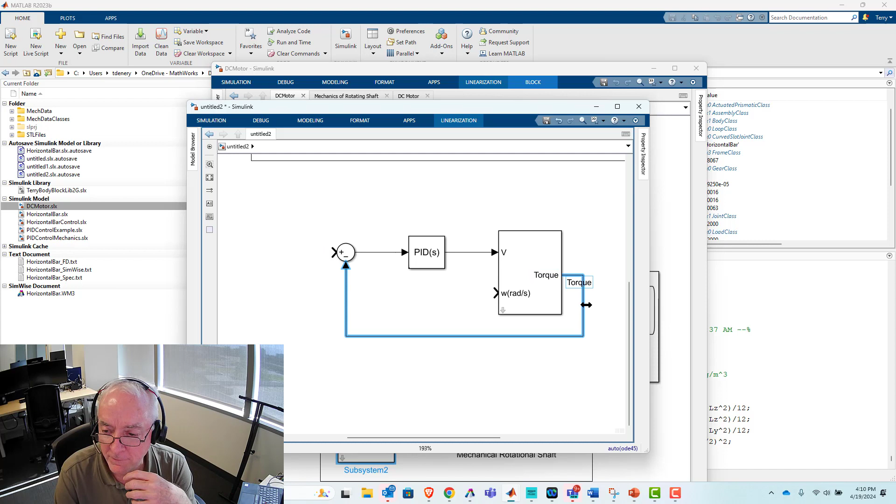And the term that often is used here is called a current loop. And that's because torque and current are going to be proportional. It's K times I, the torque constant times the current. That's going to be the torque. Okay, so this truly is conventional, even if the term torque control sounds a little bit strange. But it's the idea that we can command torque, compare it with what is measured through current, and then that error will be operated on by the PID as well.

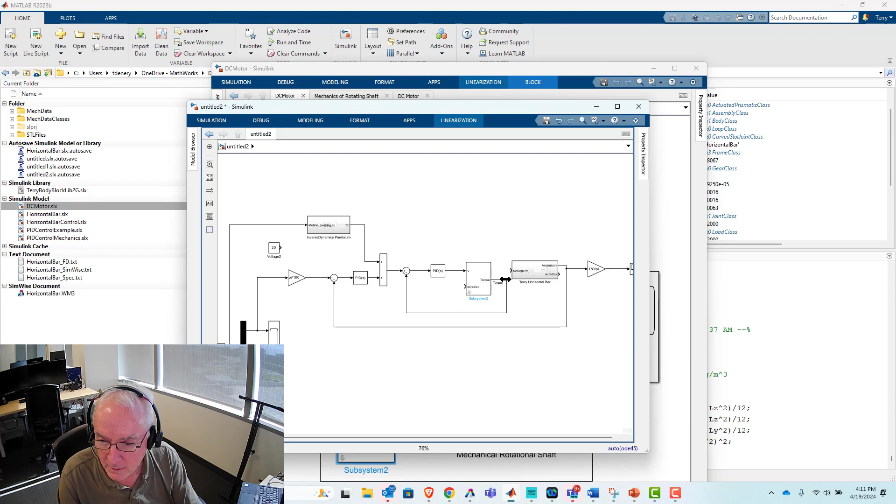All right, and so that looks pretty good. Of course, we know that angular velocity needs to be filled by the mechanics, and here's where I'll go back into this model, and I will remove the terminator on that, and I'll just call it W, and I'll make it radians per second. Okay, so that's available for us now, and I think we need a little bit more space. So give us the room we need. Okay, so we'll delete that. Bring that in like that. Connect, and there's your torque delivered by your DC motor.

Right, and I think to complete this, let's come out, take that angular velocity. I think I got all the units correct, and let's see how we do. Oh, do we have the right motor? What did we come up with again? I shouldn't have deleted all those scopes. I think it was like 20 on stall torque, and I think the rotation was maybe like 10 radians per second. Well, we're about to find out. And again, we haven't tuned our PID, and let's do the easier problem first. So let's bring the commanded motion back down to like 2 seconds.

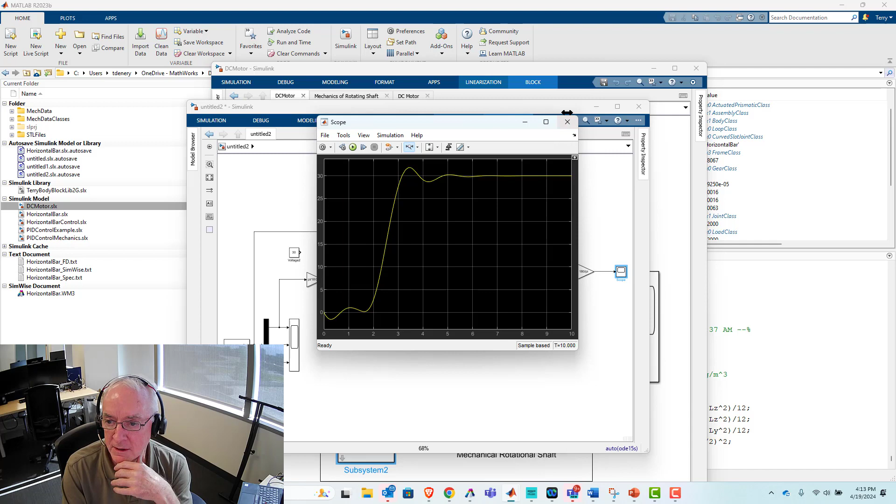It's kind of what you get, all right? We're getting the general notion of what we want, and we certainly see it wax in at 30 ultimately. And I think I will try tuning my, again, I introduced that term earlier, my inner loop. The fact that we essentially have a loop because of mechanics, maybe I'll bring that up here. Some people would argue that's controls too, but I don't want to get into that philosophical argument. But what we have is two active PID loops, and this PID functions based on this feedback of torque, and this PID operates according to this feedback on angle. And this is the new one that's untuned, so let's tune it too.

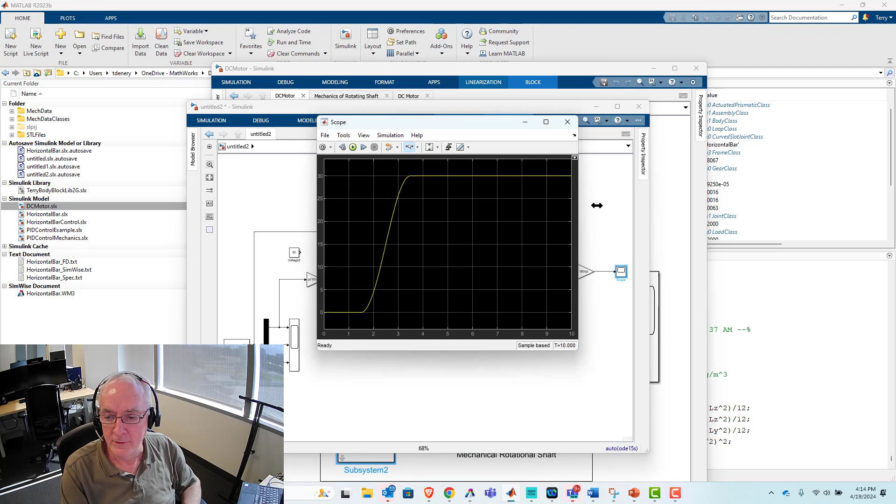Showing parameters. So a little bit different, and maybe make it slightly faster. Is that okay? Yeah, that looks okay. Basically, it's almost all I. I'm sure there's a good reason for that, but I'm not going to dive into that one right now. So let's go ahead and go with that. I is kind of nice though, because I is numerically pretty stable. And there you go. So that's with the DC motor. We're doing quite well with that. And now we know how much voltage it takes.

For that matter, we could go ahead and figure out current too, but again, that's being expressed by the torque, and in a way we already knew what that was. Right? And so for a 2-second transition, it doesn't need much voltage at all. It goes up to, what is that? Maybe like 3 volts. Yeah. And let's try the harder problem, see if it can handle that, and that's that the transition occurs in 0.05 seconds.

So that's a little bit interesting. And I want to give that one a little bit of thought. Am I okay with that? Perhaps I might go in and do a little feed forward on the voltage piece of it too, which can be done. If you get into the DC motor, you could send in torque, and torque divided by K is going to give you your I. And then if you know I, you know how much I times R is, and if you want to even take the derivative of that I, you multiply it by L, L di/dt.

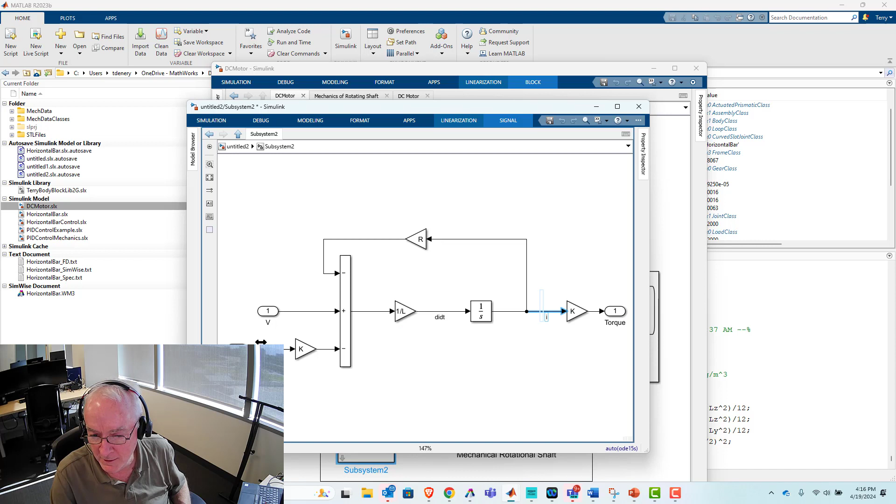And then finally, we know, based on our commanded motion, what the angular velocity would be, and that'd be omega times K. So probably some games like that could be played, but I'd say for the most part I'm pretty happy with this. And again, I want to acknowledge PIDs are really popular.

They have an incredible history of success because they really are a really, really great idea, and they work incredibly well. So here's kind of the last demo to just wrap this up. And it looks like we'll probably come in at about an hour and a half on this overall presentation.

This last demo, well, I'll just allow my desktop to be messy. It'll get confusing, but let's see if I can pull it off. All right, let me go into this one. It's called PMSM Mechanics. I encourage you, again, check this out on Terry Denery's Engineering Studio. AC motor. View the playlist.

In this first demo right here, look at that, it's less than 5 minutes even. Let's see if I can do it in less than 5 minutes then. This series gets into three-phase AC motors, which are incredibly important: permanent magnet synchronous motors and field-oriented control. It's brilliant, it's clever, it's incredibly useful, and hopefully it'll be useful for you.

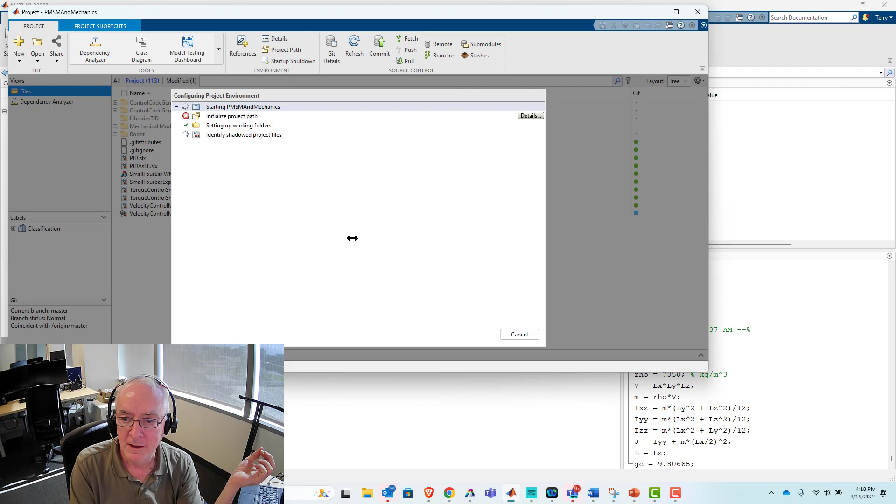So let's go back to Simulink, back to MATLAB really. Let's just clear workspace, clear commands, and open this one called Velocity Control My Way. I'm probably being a bit of a smart aleck calling it that, because what it really reveals is I don't believe in velocity control.

What I believe in is always torque control, and I think that's truly what a motor delivers. It's torque, not velocity, and we convince ourselves it's velocity. I'm voicing opinion here, but we know that terminal velocities have a relationship with voltage, and that's essentially what the no-load speed is. But there's always some transition to get there, and that transition occurs because the motor is capable of delivering the torque.

So anyways, this thing starts out as simple as it possibly can be mechanically. It is a rotation of a constant inertia shaft. We've commanded the motion that we're seeing in the top graph. Blue is on top of yellow, so I'm doing nearly perfect. But it's a constant inertia shaft with zero damping.

And it was quite easy to be predictive of this one. This is the selector block I was telling you about. It takes off the third component, the acceleration, multiplies it by inertia, and gives you that torque. That torque is fed into what I'm calling an electric drive, and the calculation of what your terminal voltages need to be takes place to deliver on that torque.

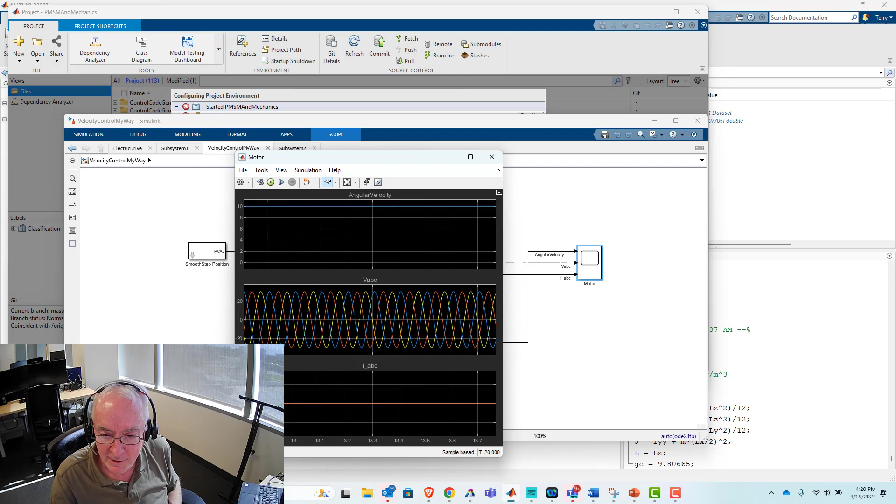With regard to AC motors, there's a guy at MathWorks named Graham Dudgeon, who is awesome at this stuff and taught a lot of us how AC motors work. About 4 or 5 years ago I was serious and diligent about understanding AC motors better. Graham graciously gave me at least 2 or 3 one-hour sessions, and we really hashed it out. He explained a lot for me quite well, and then I dived into it too.

When I got the AC motor to deliver the A, B, and C voltages, essentially 3 terminals, that looked like this, I knew I had something working properly. At this point we're spinning at a constant speed. If you do your math properly, you'll see these 3 voltage waveforms are 120 degrees out of phase with each other, which is a good characteristic for AC motors.

With my simple mechanics model, all of this is being done to accelerate the inertia, so current consumption only takes place when we are accelerating. That's a nice validation. Again we see waveforms that are 120 degrees out of phase. Okay, so kind of a cool thing. And I'll get into how I'm able to do this, because I'm a mechanical engineer, not an electrical engineer.

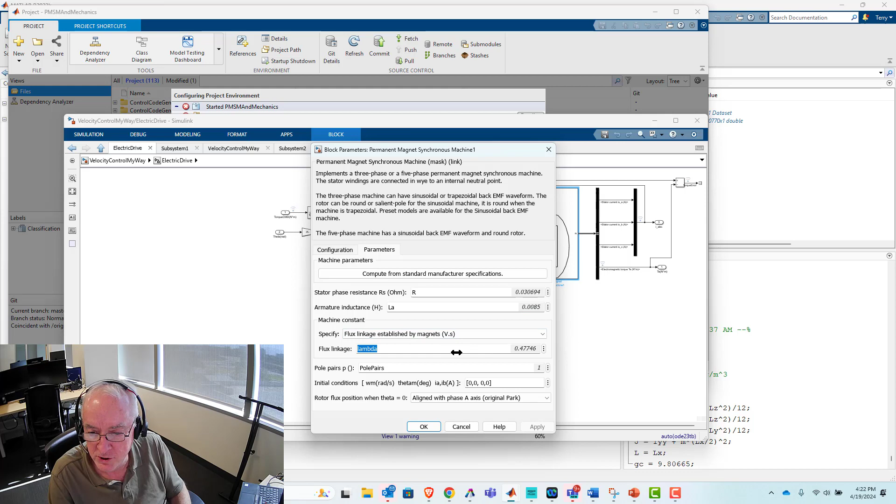Okay, the motor is defined in terms of things like resistance, inductance, flux linkage, which is kind of associated with torque constant, and then there's this thing called pole pairs too. Again, I won't get deep into this, but I'll kind of get into field-oriented control. A lot of trigonometry, at least a lot of sines and cosines, are being employed here, and I did it here just because I thought MATLAB functions were kind of cool.

But we certainly have tools in the Motor Control Blockset that are really, really good at figuring out these waveforms. And this thing called the Clarke transform, I won't get into the depth on it. Well, there is one image. Do I have it? I don't have it open. I'll just rely a little bit on some who are watching this will know about the Clarke and the Park transforms, and that those are being used in this field-oriented control approach. The whole idea that torque is kind of commanding everything. We see a little bit of that there.

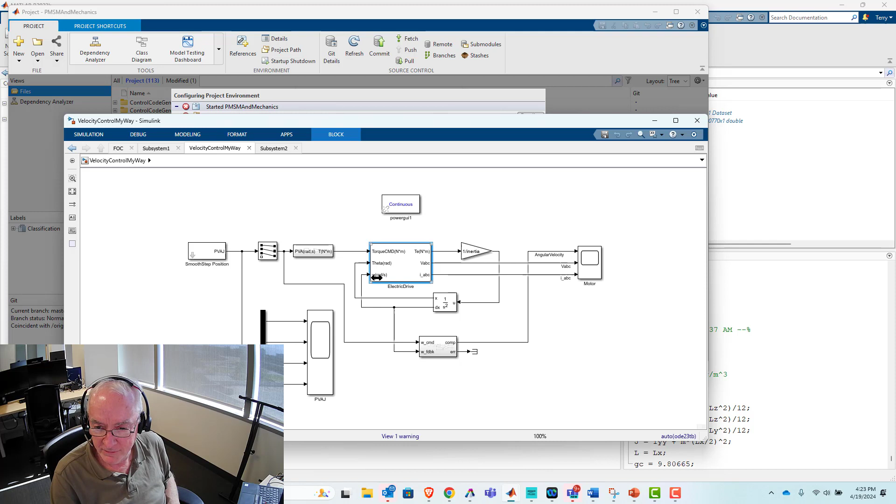And there's a little bit more to the controller. Where did I put that? Yeah, let's not worry about it. Okay, now I'm kind of curious, oh, ABC torque. That's all the FOC. Okay.

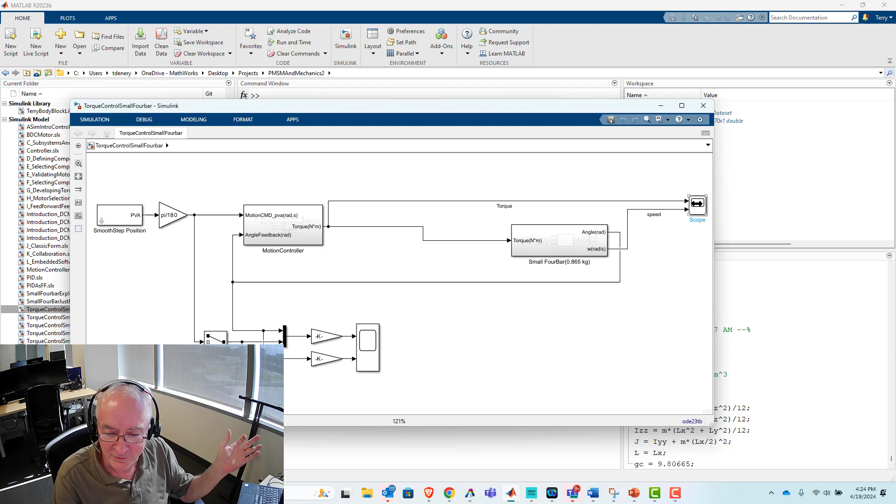Okay, anyways, what I want to do now is open up another model. And again, this is taken straight out of that video that I was pointing out that I did in less than 5 minutes. I think I'm failing miserably to break 5 minutes on this one, but let's go ahead and do this. What I think is cool about this is I'm going to show you what the workflow will look like as you master these tools and really absorb what we spent the first hour of this presentation on.

You have a mechanical model, essentially the outer loop. We command a motion. The motion we just commanded is rotate 90 degrees. And you see it does it really well. And here's the torque and speed required to do that. Okay, so now let's get that AC motor.

Velocity control my way. And I'll take both of those. That little thing called powergui continuous. Well, that's pretty important. All right, torque control small 4-bar. Let's paste this in like this. Kind of get it all set up. Okay.

And so instead of directly commanding torque into our mechanics, assuming there's such a thing as an ideal torque generator, well, it's recognized if you choose a motor properly, they can be that. We understand them really well, and we're really good at controlling them. And so our mechanics are set up so that I have a calculation of theta right there, and I got angular velocity right there. And I think I got it. Let's go ahead and hit run.

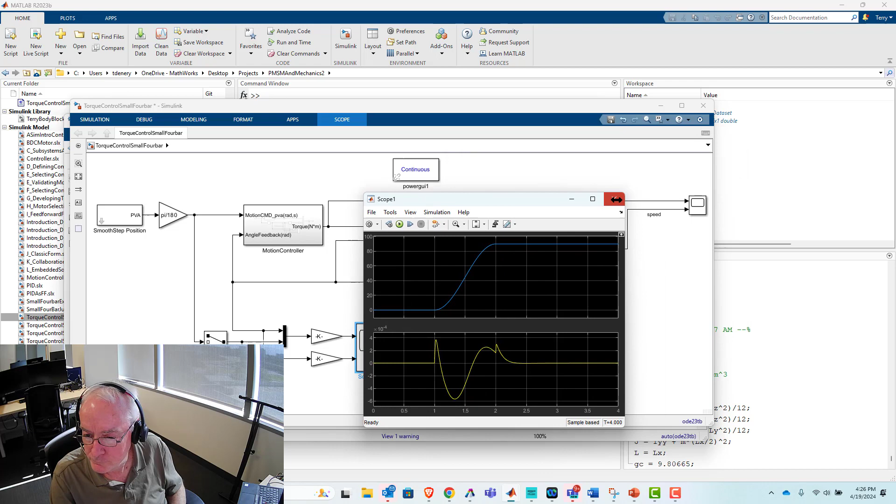All right, so what I think's real cool to look at, because we saw them before, we saw those nice sinusoids. What I think we're about to observe is how well this field-oriented control approach really works, how adaptive it is, and it doesn't necessarily need to be a constant inertia shaft, and it doesn't necessarily need to be sinusoids, so it could be 120 degrees out of phase.

And this one, we look at it and go, oh wow, it's carrying current at the end. The one circuit's going to be 0.4 amps, and the other ones look like 0.2 amps. And I'll go to this guy. As I mentioned earlier, it finishes in a position where gravity is acting on it, and it needs to carry a torque to hold that final position. And so this last piece we're going to get into right now is the fact that there's a number of ways to interpret this.

But it's really the fact that we have an inductor in circuit, and it's a real big inductor, right? And that's because the motor that we've worked with in our initial example had a stall torque of like 700 or something like that. So quite a bit of winding. So think of windings: it creates a lot of torque, but also creates a lot of inductance. And so the idea that we're giving ultimately discontinuous torque, well, that's a little bit of an issue.

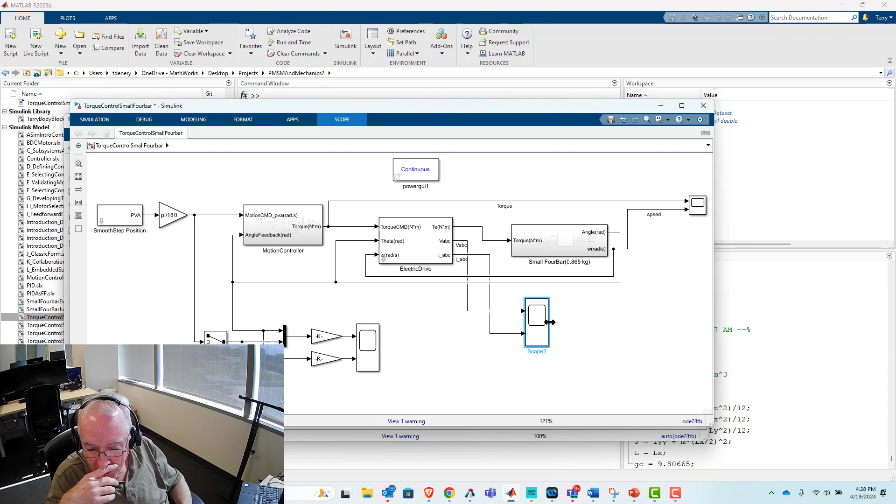And definitely there are these videos I did where torque is basically what's called J times alpha in a way. Again, because of mechanical linkage that is nonlinear, things change quite a bit. But it's this idea that, well, if you got a motor, and because currents can be on that next derivative, you actually want your transitions to be even more smooth, and that's where you get into these things where people talk about finite jerk. They'll talk about past jerk.

It's snap. So snap is the second derivative of acceleration, the first derivative of jerk. Jerk is the first derivative of acceleration, and so forth. But there's this kind of progression that's position, velocity, acceleration, jerk, snap, and the next two I think are really cute or funny if you liked eating Rice Krispies in the 1970s, which is snap, crackle, and pop. Okay, but anyways, usually I stop at acceleration, but sometimes I go to finite snap.

Okay, anyways, because this motor is so big, we're going to make it a little bit smaller right now. We see that our requirements here are less than a Newton meter, and speed is about 2.5 radians per second. So let's reduce this to 10 Newton meters. What do we have? 1 Newton meter and 10 radians per second. And again, this is what you'd find in a motor manual somewhere. So I'm going to make it 1e minus 5. And I'll even do this thing called pole pairs.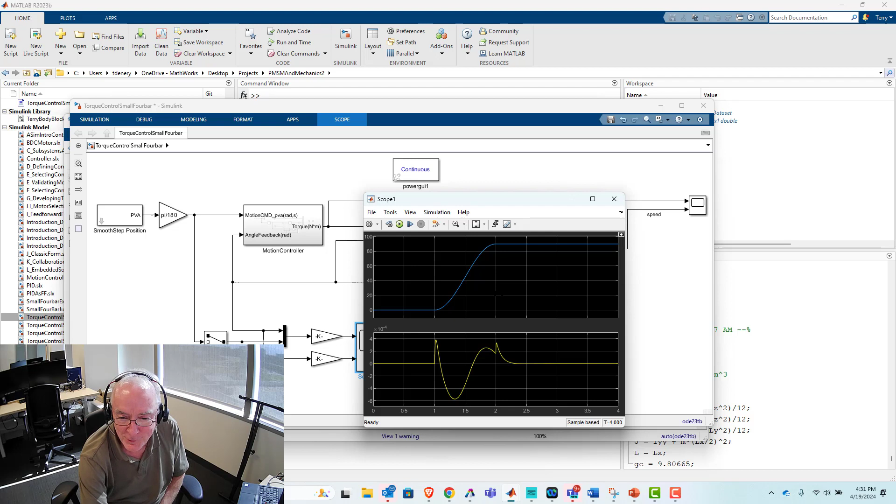So anyways, that's kind of why I wanted to present. I think yesterday it took me about 2 hours to present all this stuff and had to work through a few confusing issues. I think this one was a little bit more organized, and I think it's kind of a nice way of packaging some content that really does fit together. Usually I like to do videos that are like 10 minutes or less, and this one, I guess we're right around an hour and a half.

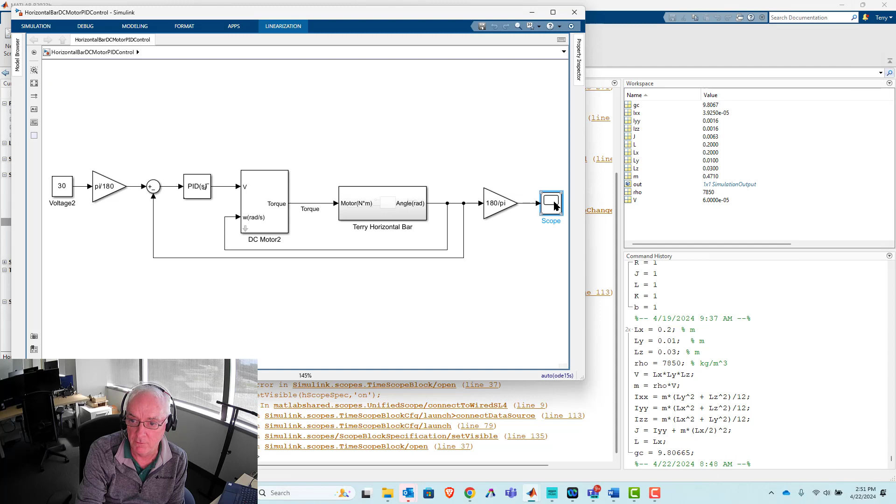And it goes up 30 degrees, and it looks decent. And we looked at this. You might recall this from the earlier part of the video. I even kind of zoomed in. Let's click on that guy right here, and you saw that little oscillation going on. And it's, yeah, it's not bad. Okay, maybe that's as good as we'll do, right?

You know, as soon as I started watching it, and I kept on seeing, oh, I'm feeding back angle into what's supposed to be a W rads per second. I'm going, oh, come on, Terry, it's right there. Let's fix this. And so obviously that's wrong, right? This is your DC motor connected to a lever bar. It actually is a misrepresentation of the physics. So please excuse me for that. I'll try to do better next time.

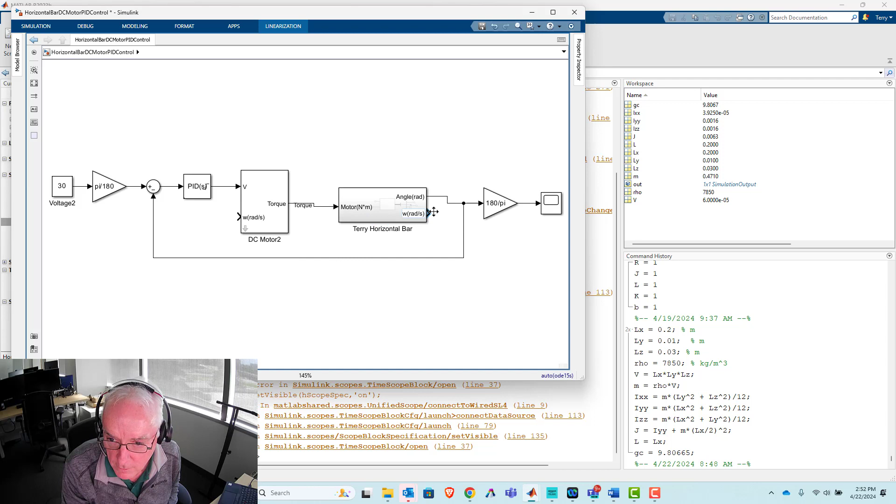Okay, so let's just delete this. And what I'm doing now is let's just go get the true angular velocity. I'll just call it W. And let's divide by S there because it's radians per second. And with that, we got the appropriate thing that will essentially drive the back EMF voltage, which is part of the calculation taking place there. And we'll just see how we do now.

And so very, very different. We get rid of all that crazy oscillation at the beginning, and we ultimately do kind of settle in. You might recall from the previous part of the video that we did saturate our controller, but I'd say it's probably a good idea to retune it. These were the values for the misrepresentation of the DC motor that we had earlier. And the solid lines, the new answer, represented by these parameters right here.

And I'm just going to go with that. So I'll update the block with that. Close this. Click on OK. And I think I'll watch, because we retuned it. So you'll have to use your memory a little bit here. But I'd say that looks a lot better. And it is saturated voltage, and so I guess that is a somewhat achievable thing with an overshoot of about 12 degrees. Yeah, we did switch to degrees, and it is position control. So that's where we are now.

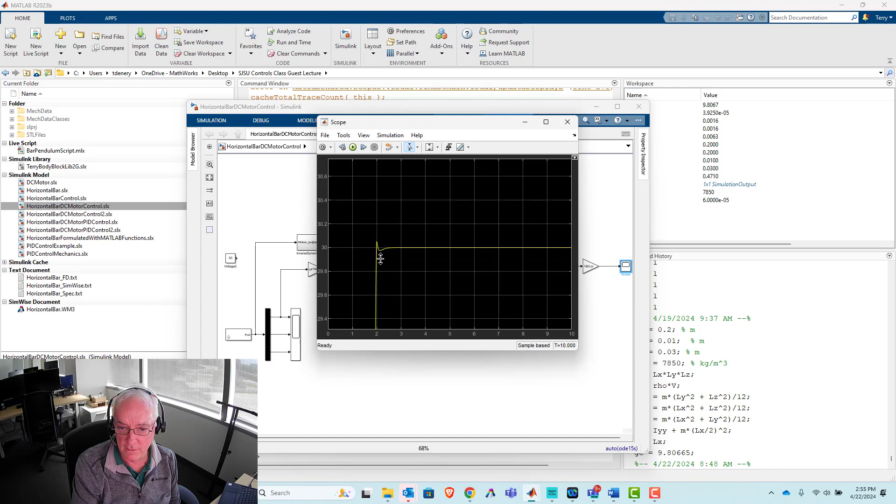And you hit run. Certainly doesn't look that bad. You might have even seen it in that animation that there's a little bit of an overshoot. And you certainly can see it right here. And it's not a whole lot, less than 1/10 of a degree, right? But it gets much more apparent when we do this. We go 0.05 seconds to do that transition. And we hit run. And you get a big old overshoot then. It's not horrible, but it's about 3 or 4 degrees.

All right, so a couple of things here. First of all, we got our inner loop and our outer loop. So here's the idea that we got a perfect torque delivery system. We're going to just bypass that motor and plug in right there. And if I hit run, beautiful. So we know our outer loop is really good, and it knows how to calculate the torque that will lead to something really close to a step function. But if you zoom in, it's not a step function. It's just a very rapid transition.

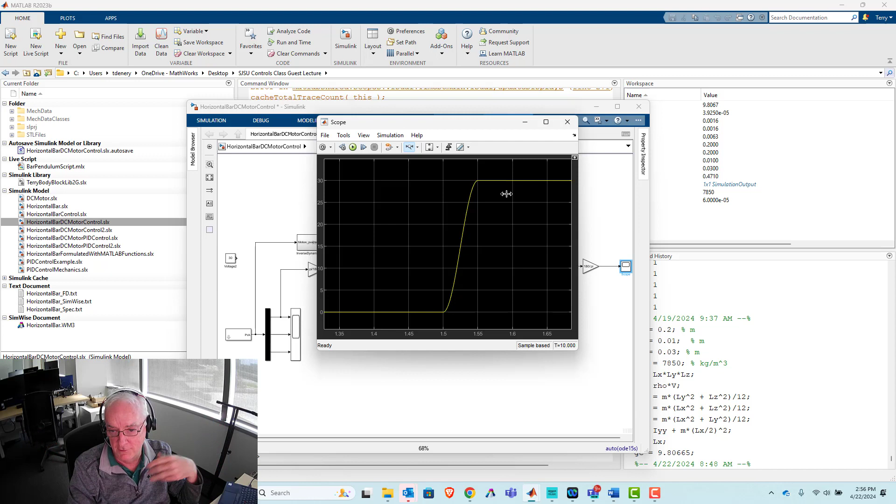And for that reason, we've controlled the angular acceleration so that it doesn't make that impossible request of infinity. It's just asking for something pretty fast as measured by this transition time right there. So that's good. And what that tells us is we got a little bit of a problem with our motor. And here's where I then found a couple of problems. I think I will move it back because it might be easier to see it this way for a transition time. Notice that this was being blocked by me a little bit in the video. So let's make it 0.5.

All right. And you'll see I put the, oh, actually I didn't. Let's see, let's put the scopes that I want in here. Well, here's what I do want. I want that torque as calculated by the outer loop, the mechanical control loop. I want it to be compared with what we are going to get here.

Okay, and so you can see that the issue we're running into is an inability to kind of deliver on that torque right there. But we also got this kind of crazy thing at the beginning, and I decided, we got to deal with that. That's definitely an issue, right? And when I first saw it, I go, okay, that might be something I want to deal with, only that it's going to allow my integrator control, part of the PID, to accumulate error that really shouldn't be there.

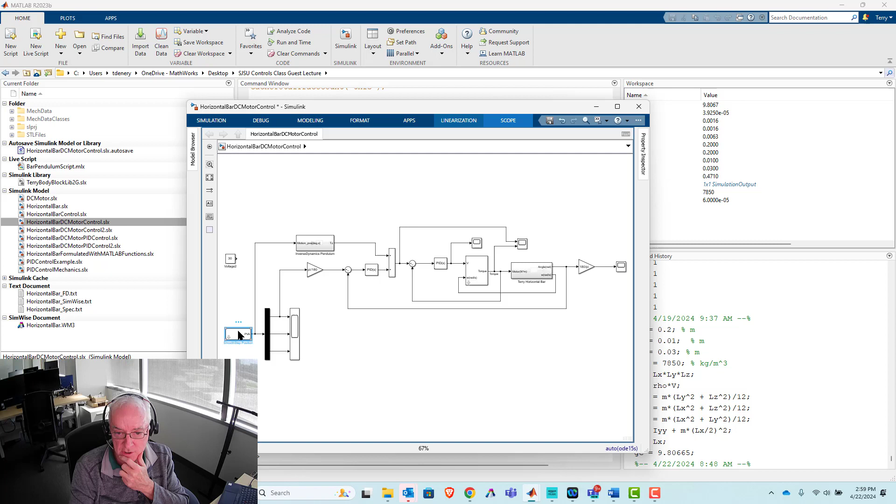And what we have here is an initialization issue. In a way, the premise of what we're doing here, which is we start off horizontal with a motor that is off, well, that motor can never actually hold a horizontal position if that shaft is really unconstrained from being affected by gravity. If we put in some sort of lock and stopped it, then maybe so. So I decided, let's get it to an initialization that actually requires zero torque, right? And that initialization would be starting off at minus 90 degrees.

Initializations always make me a little nervous. It's like, do I know the reference correctly? But anyways, we got to initialize both the mechanism as well as change our commanded motion. And so here we need to get to the revolute joint. And so this is targeting now, which is a little bit of a thing to explain perhaps at some time.

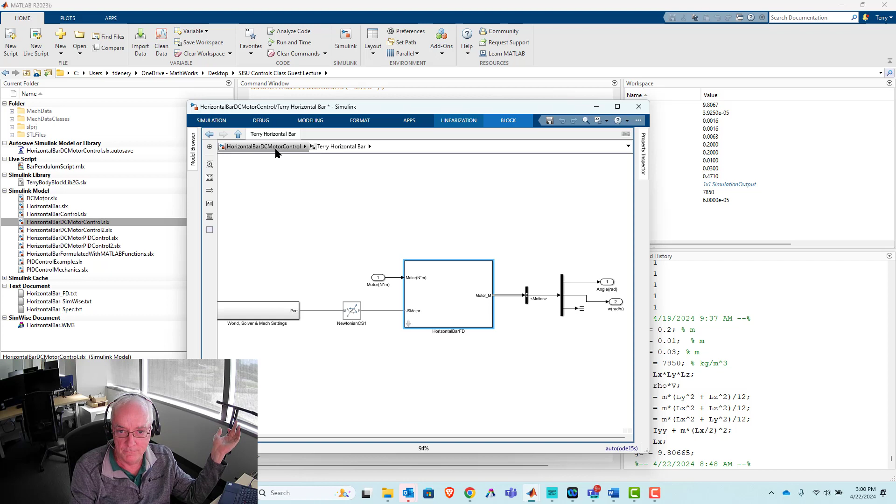Target, they use terminology like this with the tool Simscape Multibody because sometimes an initialization of one joint might actually impose an initialization on other joints, and things can conflict. That's why they use that term target. But for the most part, this is a simple system, and it's clear that that's not affecting anything else. Anyways, let's go ahead and so we get that. I think that will work.

So we're going to basically go this time from minus 90 to 30. Let's watch it from here. So if I did everything right, that should start off pointing downwards. So let's hit the green button. And all that looked really quite good. And we come in here and we see that we still got a little bit of that overshoot. So this is where things got a little more interesting for me.

And so I'll just say that I tried all the checks and made sure. Well, you can kind of see it. See here, torque. Okay, maximum torque is nowhere close to the stall torque, so that's good. And this was a little bit of a pain, but I'll do it anyways. Let's get the velocity as defined there, which is in degrees per second, and with that gain, we're going to map it in radians per second. And I'll hit run. And you'll see that we're maxing out at about maybe 7 radians per second.

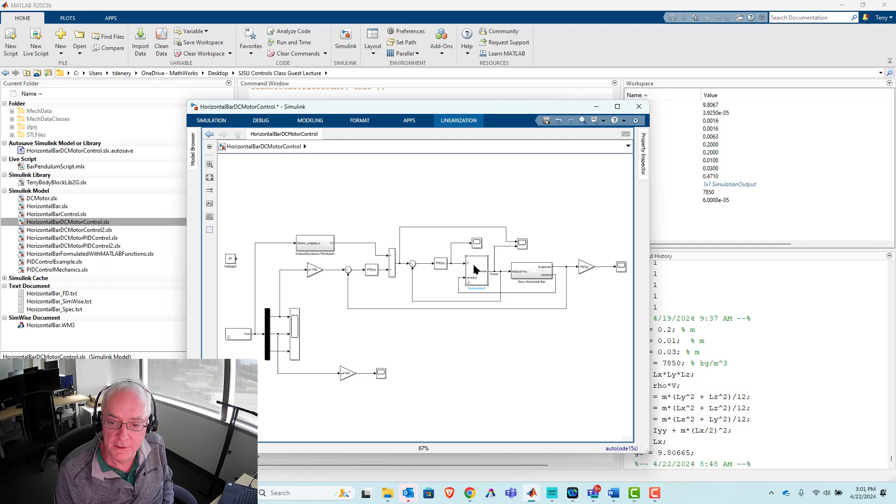And so then I thought, well, let's just retune it. And you know, it's interesting, I kind of brought that up in the video. I noticed that it's all I. And I kind of like that it's all I, because I is actually a much easier thing to calculate than a D, for example. And so I think it's implementable, right? And so tuned response and block response. Well, that's a little bit, I'd say, misleading to say that that's my tuning.

It all comes down to your requirements, and there's some general optimization that probably meets a reasonable set of standards that's been governing this automatic tuning. But for what we're really asking of this now, it needs to be way, way faster. And so I'm going to just keep on clicking on this. Actually, I should keep on showing this as I do this.

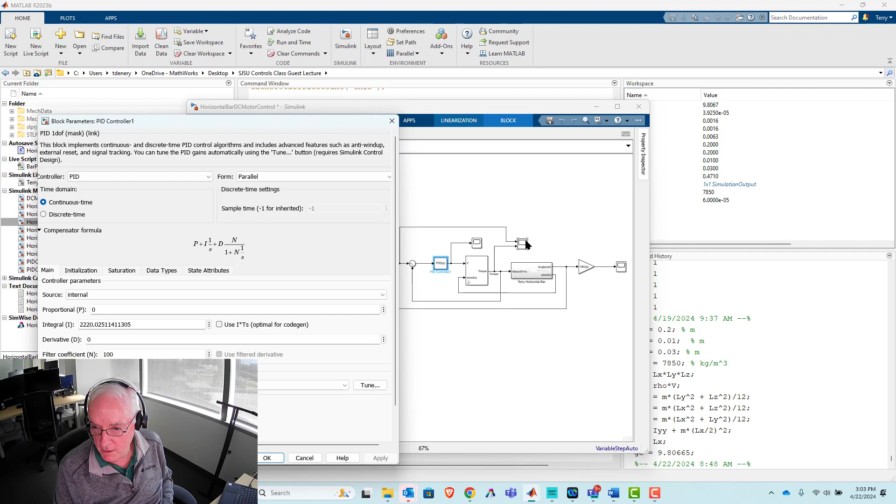And you're going to see that it just keeps on increasing my gain on I. And P and D are both 0. All right, so let's update with that. All right, and let's look at it right here. Let's hit the run button.

All right, and at least for 0.5, you're going to see we're getting really quite close. And I would say that that overshoot might still exist, but it's very diminished right now. And so anyways, that's for our slower transition. And so now let's make it really fast. It'll be 0.05 seconds. We'll hit run.

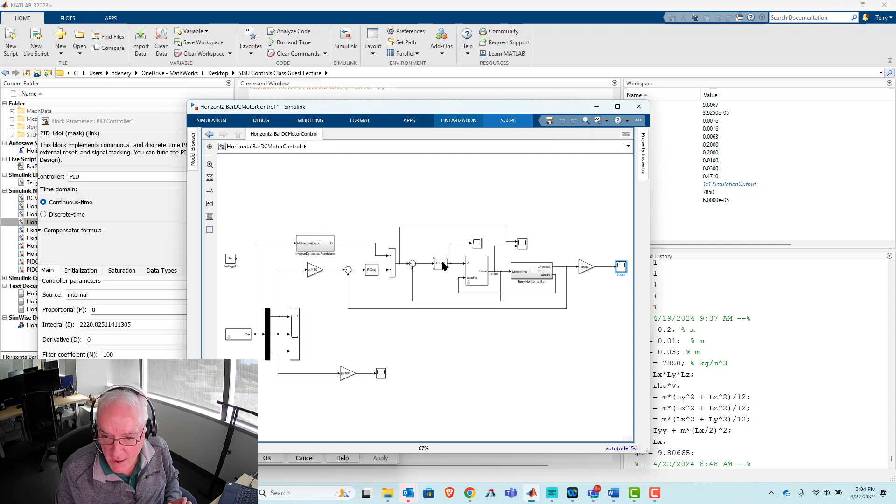And so we're still getting that overshoot. Again, this will come down to your requirements, and perhaps there's an issue with the tuning that I'm going to do. But again, I like I gain because I gain is integral. It's a little bit tricky to take the derivative of a discrete signal, meaning that you only get a point every sample time. But integration works much, much better. It's just like area under the curve, Runge-Kutta type of numerical integration.

And the other thing going on here is, well, it's all I, and in a way I don't even really need to jump into the optimizer or the tuner again. What I did find was about 10 times this, which would be a little bit over 20,000. I'll make it 20,000. And I'll hit run. And it's almost 0 now. Right. And again, we could probably make it even bigger, but I'm kind of happy with it right there.

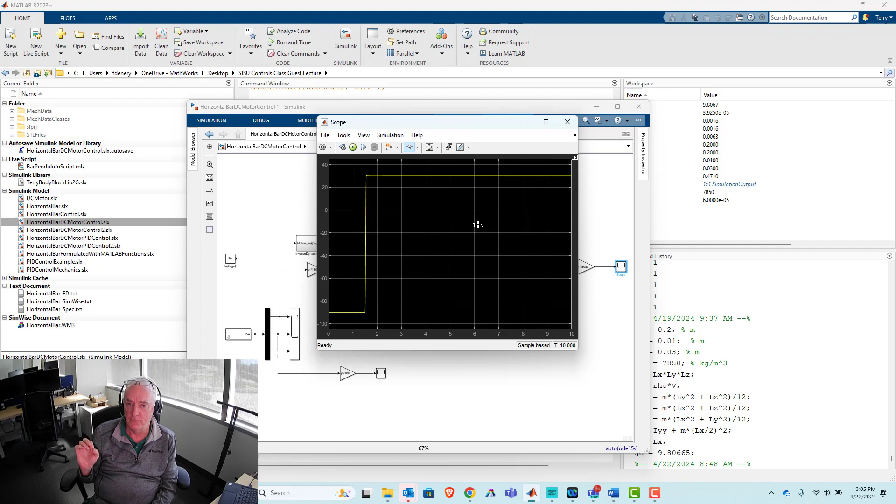The conclusion that I was really going for as I put this whole presentation together was: what you know matters. What you know will be incredibly useful for you in controlling such systems. And maybe here's a good way to wrap it up. This goes back to a really good customer meeting I had a few years ago. I was working with a real good controls engineer, and he basically told me, if I'm really doing my job right, it's like my PIDs do nothing.

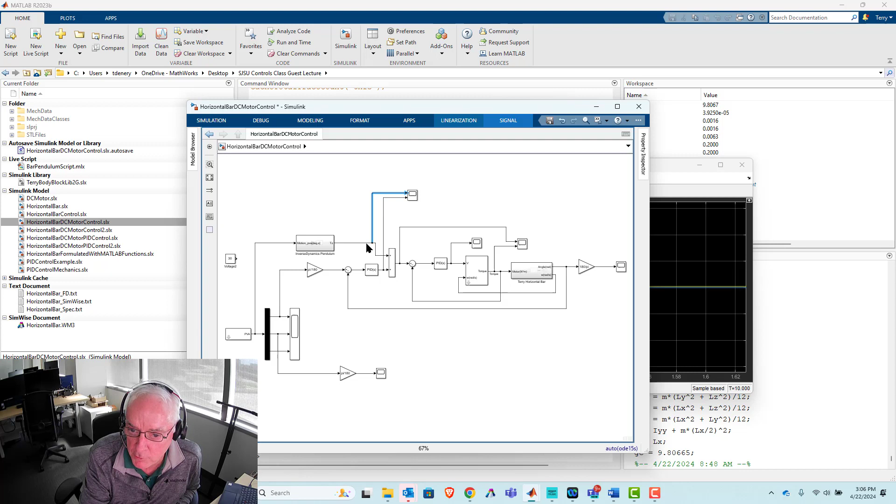Okay, and let's magnify that so we can really see it. Let's also zoom in on where things are really happening. All right. What we got here in yellow, because it's going into the scope right here, that's the contribution of that calculation. You're going to see they're just summed up, added up directly. That's coming from your feed forward piece, and this is what's coming from your PID, or your feedback.

And I think the correct way to say it is, if I'm really doing my job correctly, my PIDs almost do nothing. And what they're really doing here is what they do really well, which is make error go to zero. The feed forward's great, but as soon as things go off from our presumption, which comes from knowing what we were commanding it to do, as soon as that's not what's really going on with the real linkage, then all bets are off, and what you might be doing through feedforward might be more destabilizing than stabilizing.

And the job of the PID, I think of it almost like a rubber band. It holds together what the real physical system is doing compared to your model, your anticipation of what it will be doing. And every time it begins to depart, it essentially applies the restoring force that keeps them synchronized.

So anyways, I feel pretty good that we covered the material that supports that conclusion quite well. Certainly, I think what I'm showing you is a real professional way of designing control algorithms for real systems. We focused on the mechanical piece in supplementing the overall presentation, but this works for anything that you might control. It would work for your air conditioner.